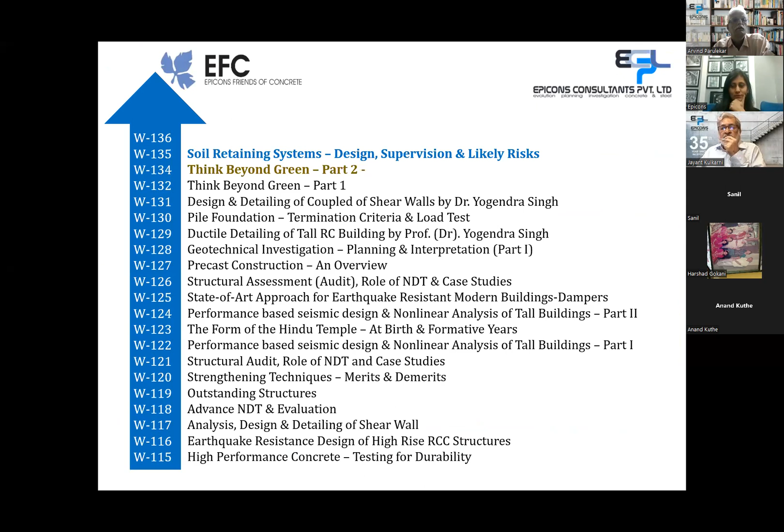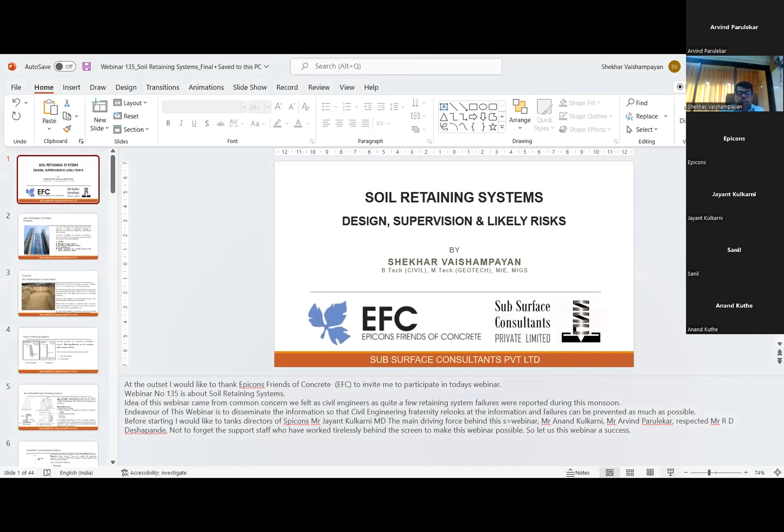Okay, there you are. We are going to have a discussion today on soil retaining systems, design, supervision, and likely risk. At the outset, I would like to thank Epicons Friends of Concrete (EFC) for inviting me to participate in today's webinar. Webinar 135 is about soil retaining systems.

The idea of this webinar really came from a common concern we felt as civil engineers, as quite a few retaining systems actually have failed during this monsoon. The endeavor of this webinar is to disseminate the information so that the civil engineering fraternity relooks at the site conditions and situations, and failures can be prevented in future as much as possible.

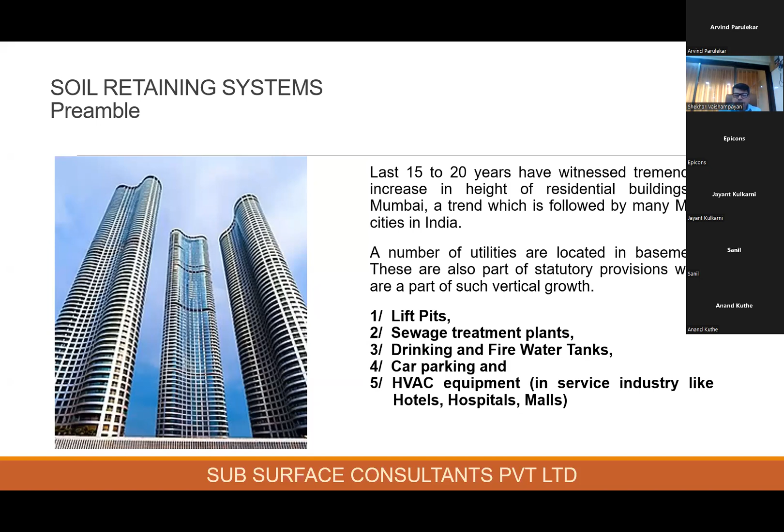Let's look right from the start, from the basics. We are going to look at some basics first so that we have a starting point. Generally, excavation is done these days by excavators like JCB or Poclain, and a good quality Poclain has a reach of about 4 meters. So generally, as and when excavation crosses 4-meter depth, one would tend to call that a deep excavation. The most common depth of excavation on account of utilities is between 7 to 10 meters, and in many cases it can go up to 15 to 20 meters.

In most projects, what happens is the excavation contractor comes to site and has a tendency to carry out the excavation nearly in a vertical line. It stands for a short time and gives a false sense of security to people - 'kuch nahi hota hai' - nothing will happen. But all of us know in our heart that this is going to fall down. Soil will remain stable for a short while and then it will fall down, taking a natural slope of the natural angle of repose or internal friction.

But then which will mean that it has to occupy and consume a lot of space. Now, is it possible for us? Because in most of the projects, the clear distance between the basement face and property boundary is only about 1.5 to 3 meters. In such cases, excavation with safe slopes, as said initially, would simply encroach into adjoining property. That's the main calamity or critical point.

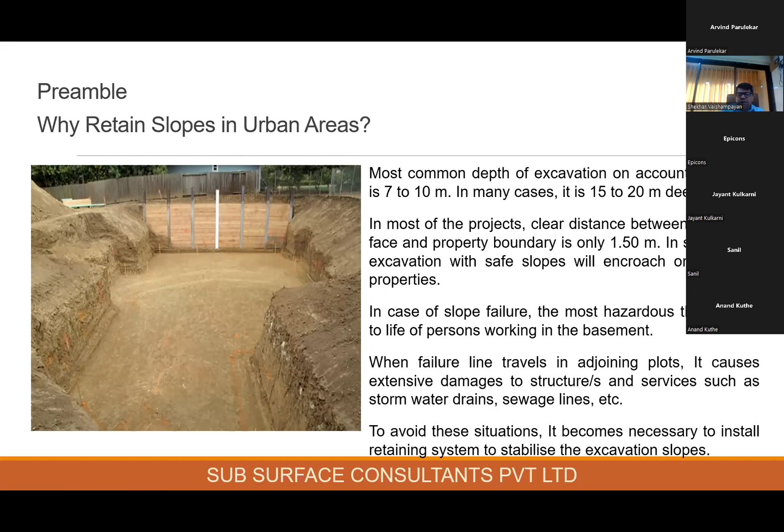In case of slope failure, the most hazardous thing that can happen is it will risk the life of people who are working in the basement region. And a failure line traveling to adjoining plots will cause extensive damages to structures and to services. To avoid this kind of situation, it becomes necessary to install a retaining system to stabilize the excavation slopes.

Now, generally speaking, let's look at what kind of retaining systems are possible. We all know generally that the soil or rock actually supports the foundation. But retaining systems are a typical soil-structure system, structures which support soil or rock, and they are also supported on the soil, but they support soil and rock themselves. So that means even inside retaining systems, there are two subtypes.

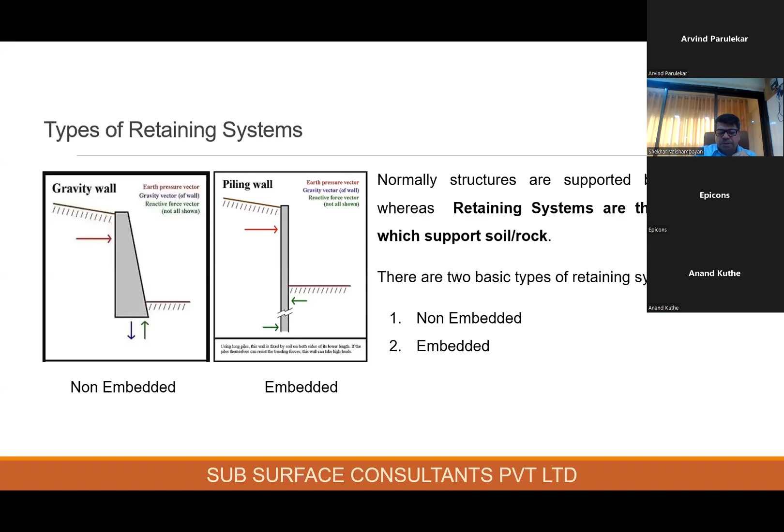One is non-embedded and the second one is embedded type. Now let me explain what is non-embedded and what is the embedded type. Let me go to the next slide.

Basically, we can see non-embedded type retaining system is the one where you excavate first and then construct, so bottom-up sequence. This supports soil fill behind them. So what one does is excavate up to the foundation depth, a small depth, not deep, and that's why I'm calling it non-embedded. And then you construct the structure on top, whatever may be the structure, and then you fill soil behind that.

Now, the examples of such structures are primarily gravity structures: stone masonry wall, then you can have an RCC wall. The first type would be the typical cantilever retaining wall. Then the second type, when the height of retaining wall becomes too much, you will have counterfort retaining wall. And in some emergency situations, one can even look at reverse cantilever wall, which is abutting the slope or the excavation side. Other types of gravity structures have also been in practice, like reinforced earth walls, gabions, crib walls.

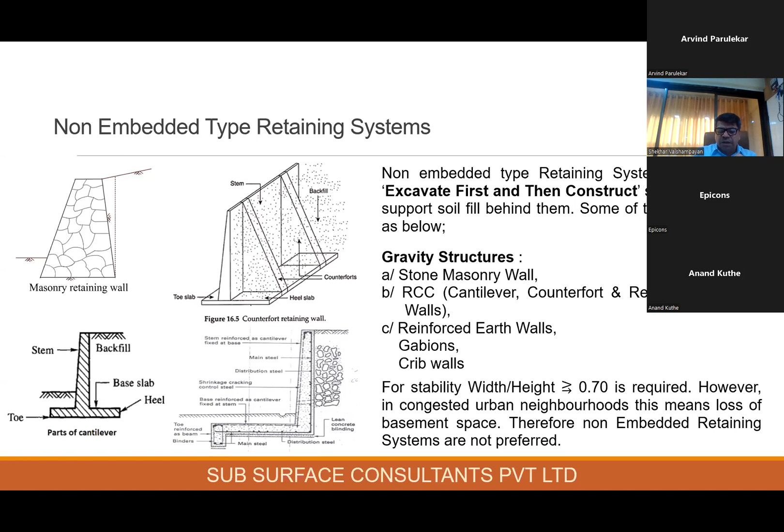All these walls have stability based on translation and rotation. Now, for achieving stability, the minimum width to height ratio is at least 0.7. When you have a width to height ratio of 0.7, in our congested urban neighborhoods or cities, there's hardly any space available. If you want to construct a basement below ground and cannot sacrifice width of 0.7 times the height, that will mean non-embedded type retaining systems are not going to be preferred at all.

Now, what is the other type of system? In embedded type retaining systems, we have install first and then excavate process sequence. In this, these structures are usually self-supporting. They derive stability from the passive resistance experienced below the excavation depth. And there are also two types of structures in this: one is cantilever type embedded walls, and the other is propped cantilever type embedded walls.

Now, what are these typical retaining elements used under this head? You can use sheet piles, which is a very conventional old method. You can use box piles, rolled sections to form box and then drive them. You can do contiguous piles, secant piles, diaphragm walls, rectangular panels like barrette panels and all that. Maybe something else would be possible, but these are all the major types used in practice.

Okay, so as we said in the last slide, we have a cantilever and a propped cantilever.

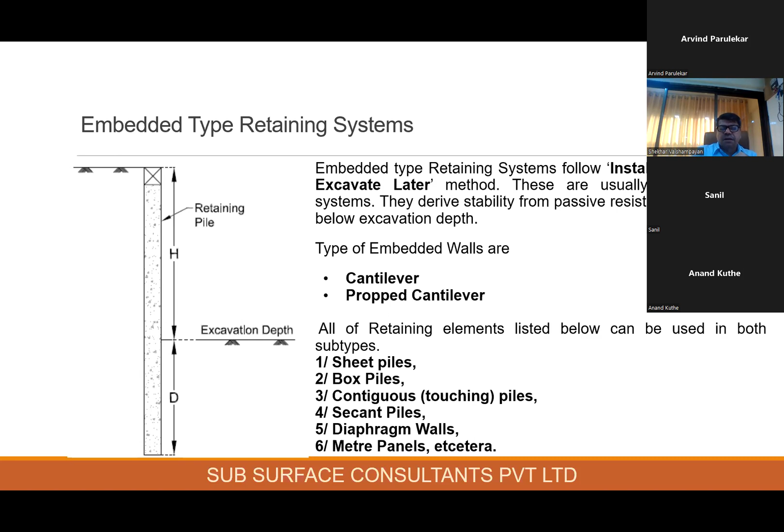To achieve propped cantilever support, we can provide support internally and externally. Internal supports will be horizontal struts and rakers from inside the excavation, and external supports will be deadman anchors or tieback anchors from outside. You can also do propping at the excavation level.

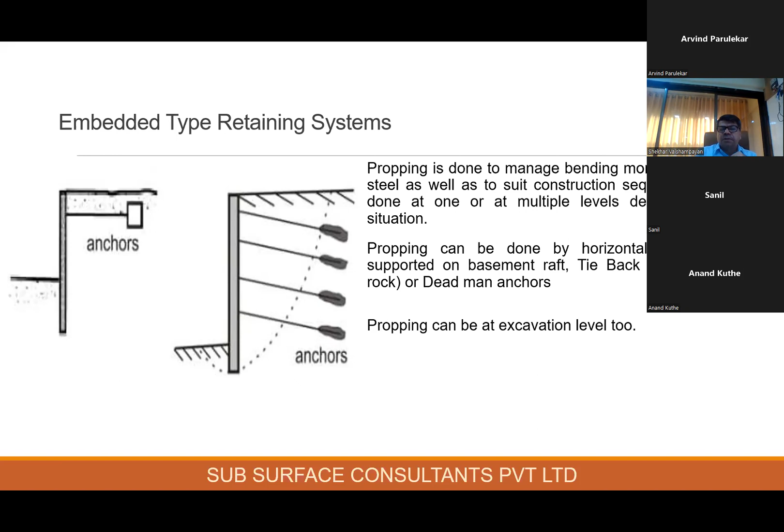What does propping do for us? Propping allows us to reduce the spans, so bending moments are reduced, and you can save on the reinforcement steel in the retaining systems, piles, or walls. It also can suit the construction sequence. Propping can be done not only at one level but at multiple levels, depending on the site situation.

Now I'll explain what different retaining systems are in practice right now. The first type is contiguous piles. This is a row of successive unconnected cast-in-situ concrete piles with a small gap of about 100 to 150 mm between the piles. Typically these are called contiguous piles.

These are very suitable in cohesive soils because arching of the cohesive soil prevents collapse of the soil in between. This is usually used where the groundwater table is not high. Permanent liners may sometimes be required, but this is typically called touching piles these days, which is a misnomer since they are not supposed to touch each other. The gap between the piles is also expected to release water pressure, if any.

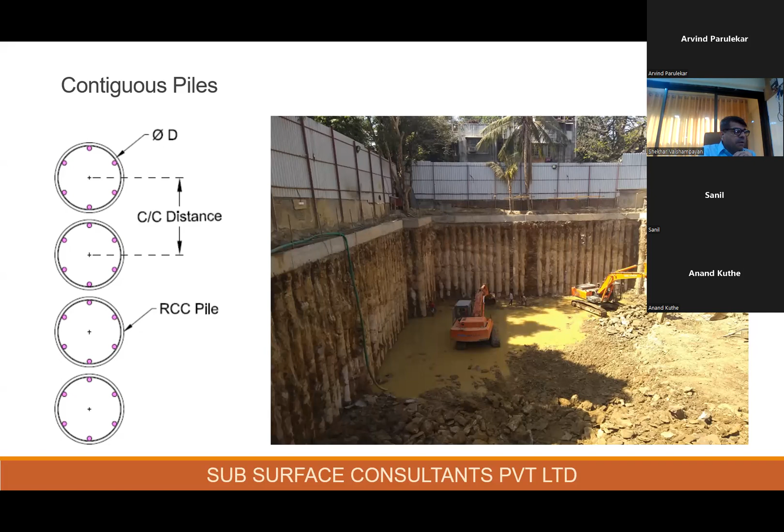Now let's go to the next slide. Second, secant piles, just like contiguous piles with a gap in between. Secant piles are a row of successive overlapping cast-in-situ concrete piles. A typical overlap of 100 to 150 mm is provided, similar to before, but here we have an overlap instead of a gap. This is typical of secant piles.

These are most suitable in non-cohesive soils with a high groundwater table. When water is flowing in, you need to stop it from entering the pit, and erosion of soil can be controlled. First, the PCC piles are installed, drilled and cast. This goes up to the excavation depth, or maybe a little more, or up to rock depth if rock appears before that.

Then the RCC piles are drilled within the next 3 to 4 days, while the concrete is still somewhat green, to achieve the overlap so that the PCC pile can be cut easily. Then RCC piles are installed and cast inside with reinforcement, which is meant to carry the bending moment. The overlap between the piles is basically to ensure that water ingress is minimized. You can see in this picture, the water is practically not there.

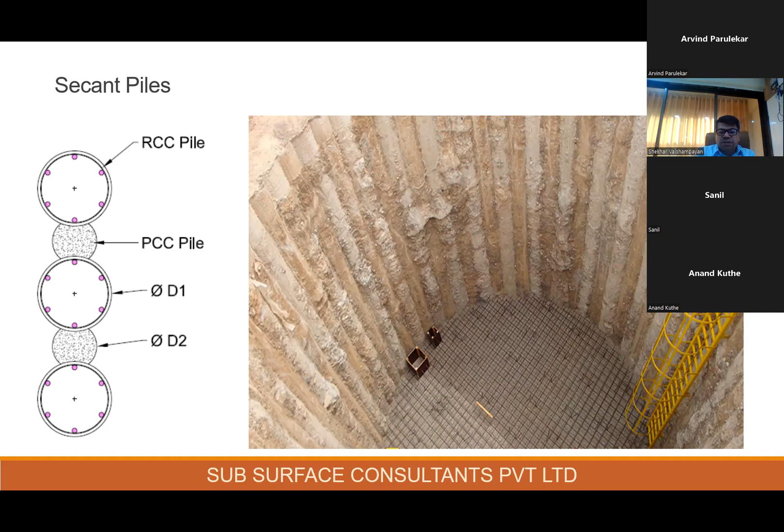Now let's look at the propping systems, different propping systems.

Let's look first at external supports. The basic external support is where sufficient space is available. Traditionally, a deadman anchor has been used, mainly in ports and jetty constructions where a lot of space is available. The deadman has to be installed well outside the failure wedge so it can develop passive pressure on the face, which allows it to carry the tension in the string in the middle. But this requires a lot of space, which is once again not possible in the urban setting.

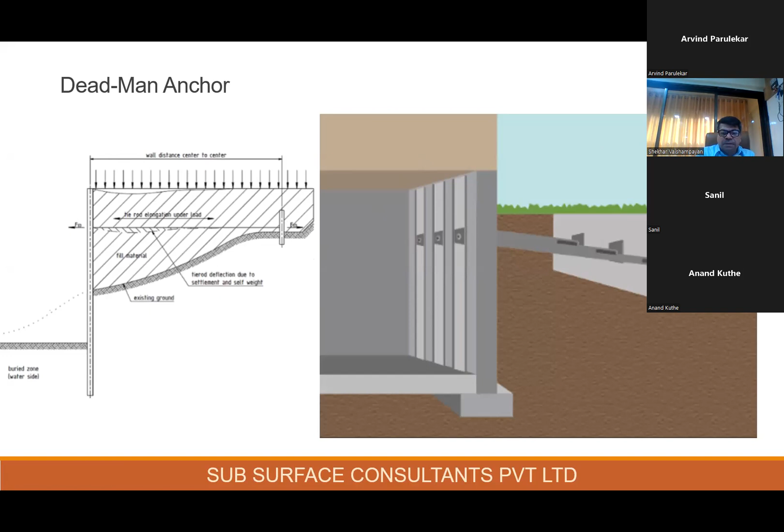A typical, very commonly used system would be to adopt tieback rock anchors. Where space is at a premium, tieback rock anchors are used to control deflection. They are also used to reduce bending moments and therefore the steel in the piles. It is possible that one may have one level of anchor, but depending on time or excavation demands, 2 or 3 levels of anchors may also be used.

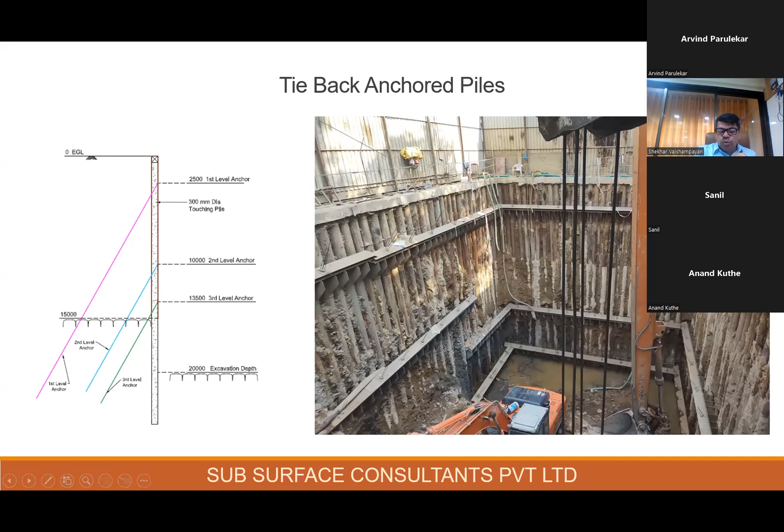Okay, now let's look at the inside supports. What used to be done is rakers on the right side. You can see there are rakers actually placed against the retaining walls. These are a very old method and possibly used today only in SOS conditions.

Rakers would require, if you use rakers, it will obstruct your flow of work, so they are not preferred. They require very firm support at the bottom, maybe a pile head or a column bottom or a raft at the bottom to be able to take this load.

So you can see the situation on the left side where a complete horizontally braced struts are possible, and now they actually can be provided in different levels. And in general, in this case, enough space is left in between.

You can see some construction equipment below, down here, yellow colored, and they are carrying out their work here. And the bracing has to be also designed in such a way to accommodate the movement of the equipment below.

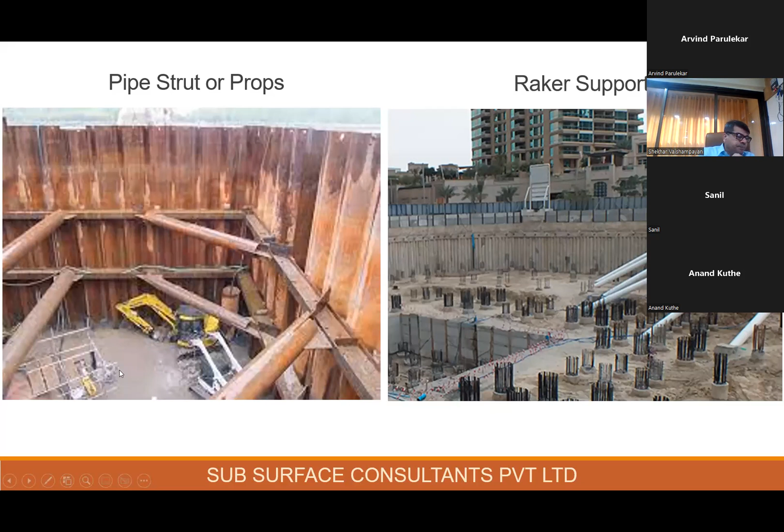The next typical structure would be diaphragm walls or rectangular piles, meter panels. Meter panels and diaphragm walls are basically brother and sisters, they are the same thing. So rectangular shape piles are used, either using a grab or a rectangular shape baler, and you actually use them to excavate this.

These are very popular in the alluvial soils. You can see in places where there is a lot of clay, these are done actually very easily. You can see the considerable depth actually has gone into this, the truck looks so small here, so this is probably maybe 20 meters or so.

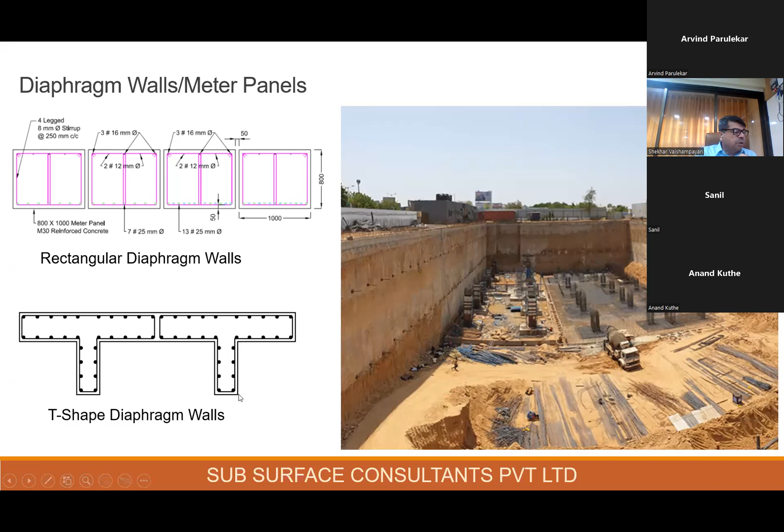And they are not only rectangles, but wherever more stiffness is required, you can also use T-shaped diaphragm walls. So both of these are also possible to you. And we can go to the next slide.

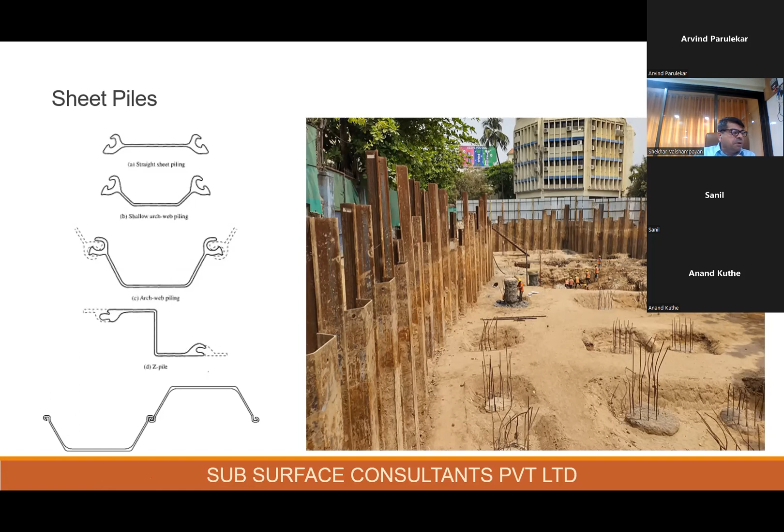In this particular site, the bottommost was used. There is a locking arrangement at the end of each of this, a male and a female joint. So once they get actually inserted or locked into each other, they prevent ingress of water when the excavation is done. So sheet piles were very commonly used and a preferred method.

Now we are going to look at the next one. So we once again have an urban setting here. You can see a lot of structures behind this, and we are forced to do contiguous piles. You could not do sheet piles, or secant piles in this place, because they're either costly or not possible to execute.

Maybe liners were required, I don't remember now, but this is what was done. And what we did here was we excavated, and as we went on excavating, we went on doing gunniting or shotcreting on this face by doing jali. You can see jali in some places here, and gunnited the whole face to make sure water doesn't flow in and erosion of fines doesn't take place.

Obviously we have to do this in a fair season so that when it comes to monsoon, we are actually prepared for this excavation. The pit is more or less dry, we can carry out excavation. So we can say this is a variant of contiguous piles with shotcrete, that is a variation.

Now, contiguous piles can also be paired with bentonite piles. Instead of doing this shotcreting on the front side, which is negative side waterproofing, you can actually plug the flow of water where it enters. So where the water is entering from this side, you drill holes on the upstream side, between the shore piles and the property boundary, a small hole between two piles, and go right up to the bottom and pour sand cement bentonite slurry. So it forms a low modulus concrete, very plastic in nature, so that also plugs the gap and doesn't allow water to come in.

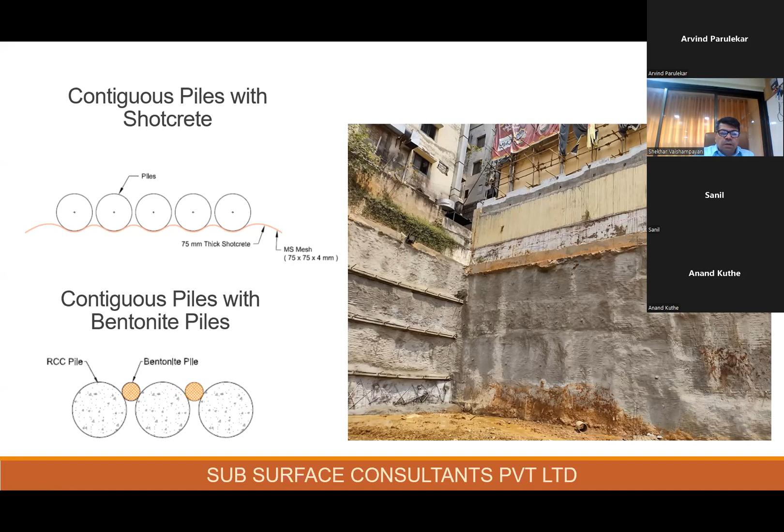The next one, this is very commonly used these days: piles with rock bench and ledge.

As and when you have an excavation depth X or H you want to reach, and way above that you hit bedrock, there's a tendency to use the strength of the rock to reduce the length of piles and economize on pile length. The rock bench is provided only if bedrock is in good condition and present at a depth well above the final excavation depth. It will also require sufficient space from the basement wall and property line to ensure adequate width of the rock bench.

It is possible to design a retaining pile length, as shown here, which is less than the final excavation depth, but it is better and safer to provide the pile length right up to the bottom of the excavation. At least that should be done. This rock bench is always very susceptible to excavation effort and can fall down.

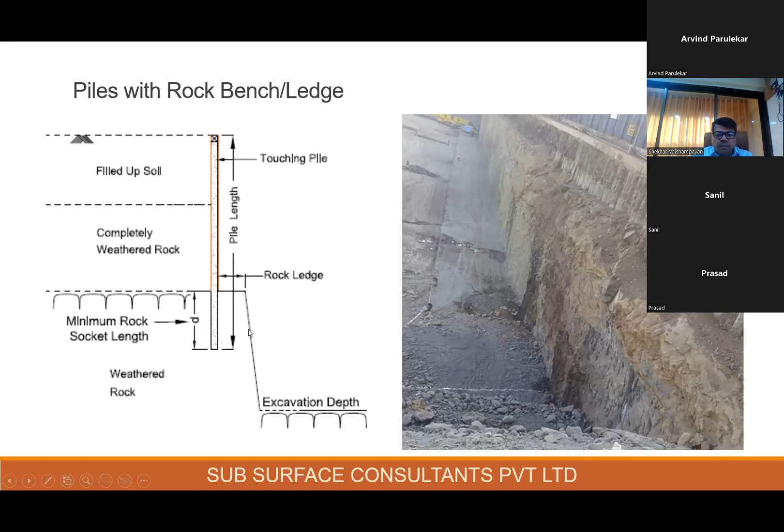Hello? There's some disturbance. Okay, then let's look at the next option.

In this next option, we have shotcrete gunniting with nailing, soil nails and anchors. This is actually not install-first-and-excavate, but a variant of the first method where you excavate first and then stabilize.

When sufficient space is available between the property line and the basement wall, you can try to adopt this. You excavate first and then stabilize, and go on to do the work in steps.

You first do a step excavation, drill the rock anchors or nails horizontally, put jali on top, then connect that or plaster it by putting a shotcrete layer so that you have stabilized this surface. After stabilizing this surface, you come to excavate the next step and go on gradually.

You can see here that there is definitely a step inside, or you are losing more space of the basement. So it is possible only where such space is available.

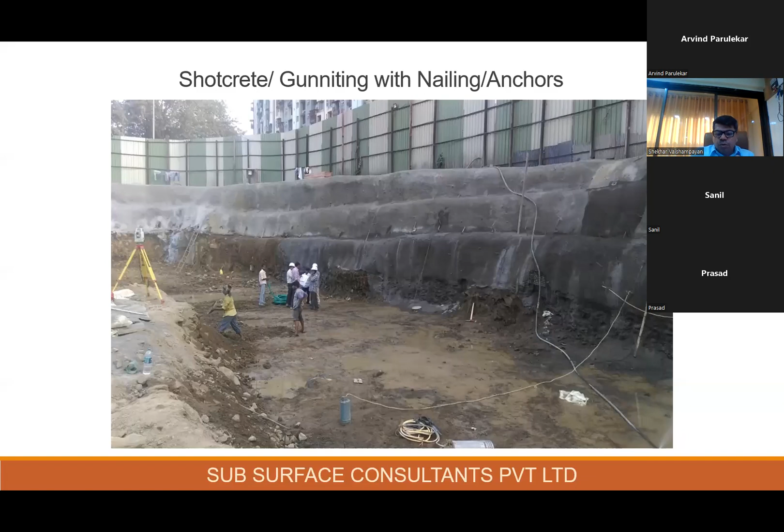Okay, so this is all we can have about the standard typical retaining systems. Now I am coming to an area of risks involved in the design of retaining systems. At this stage, I have finished my segment on the types of retaining walls, and I would like to discuss aspects of the design of retaining systems.

In the design of retaining systems, obviously, basic principles of statics are used where equilibrium has to be achieved and minimum requirements are computed. Describing the whole thing in detail would be like sitting in the classroom again in college days, so our idea here is to share our knowledge with you so that these cues act more like red flags to you in the future, while designing as well as checking somebody else's designs.

So what are the things that we look at? The risks involved associated with designs. In designing retaining systems, you generally compute destabilizing and stabilizing forces. You can estimate them using standard practices, and the length and reinforcement of the embedded retaining system can be easily worked out. Let's look at three basic main steps.

You can take the summation of bending moments, set it equal to zero; this will yield the minimum embedment depth of the embedded retaining system. Sigma H equal to zero will yield the location and value of maximum bending moment. I won't go into how. The third factor, sigma V equal to zero, is not very relevant in the case of retaining systems, because they are not part of the permanent structure. These are basically enabling structures, and very rarely are retaining piles loaded with vertical loads.

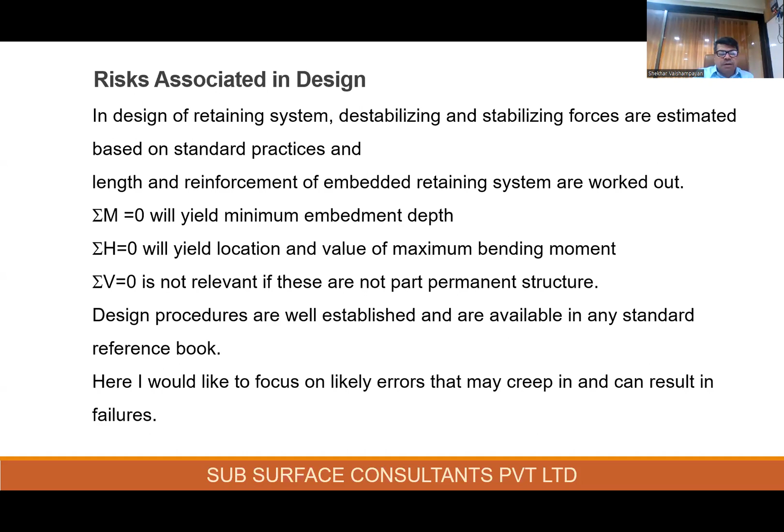Design procedures for all of these are well established, and many softwares as well as standard reference books are available. I would like to focus on likely errors that might creep in and result in failures. So let me go to the first one: the results in likely errors in engineering parameters themselves.

Let me list them first, and then we'll take them up one by one. Design parameters for each stratum of soil and rock, where you establish, compute or estimate active or passive pressures; then water pressure due to the ground water table; then surcharge pressures because of various loadings at the edge of the excavation; then deflection of the pile or retaining wall; then existence or evidence of rock ledge; and then assessment of the possibility of heaving of clay and sand boiling conditions and its mitigation. So these are the conditions we are going to look at.

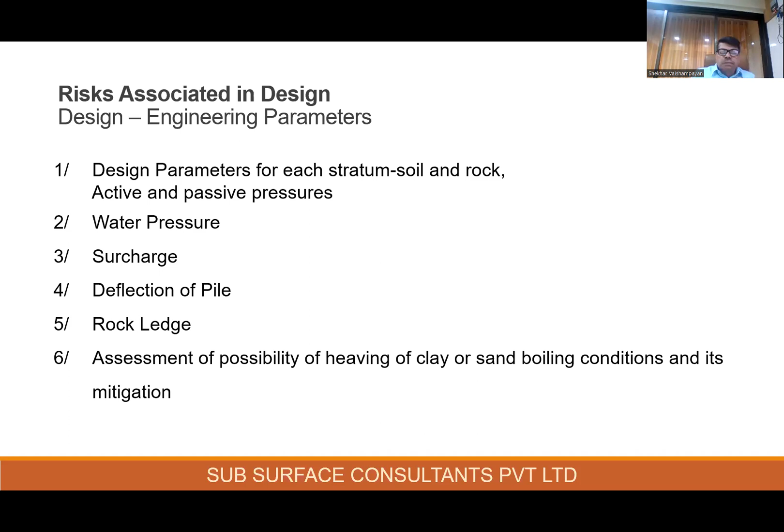So the first one would be the difference in design parameters in site conditions. So first is design parameters.

So what everybody does at site is, you drill some boreholes, few boreholes, and after drilling them you come to a conclusion and calculate, doing some lab testing, calculate C, phi, gamma, UCS of rock, etc., until you estimate your design parameters.

Now let's look at two typical cases. The first case on the left side, the perimeter is 84 meters, and we had two boreholes drilled in this area, so one borehole for every 42 meters, and somehow these boreholes are not anywhere near the perimeter of the building or the excavation line. So these are basically at irrelevant locations, and that can give us a problem because the variation in the strata is not known along the plot boundary.

Now consider the other case, a much bigger project where the perimeter of the plot was 1150 meters. 30 boreholes were drilled here, out of which 14 boreholes were more or less along the perimeter, so one borehole for 85 meters each. The locations were relevant definitely, but they were too widely spaced. So these are two limitations.

In addition to irrelevant test locations and insufficient number of boreholes, we also have insufficient laboratory testing. Suppose somebody drills a hole and tests only 2 or 3 samples of soil and maybe 1 sample of rock from each borehole - then the data available is very limited.

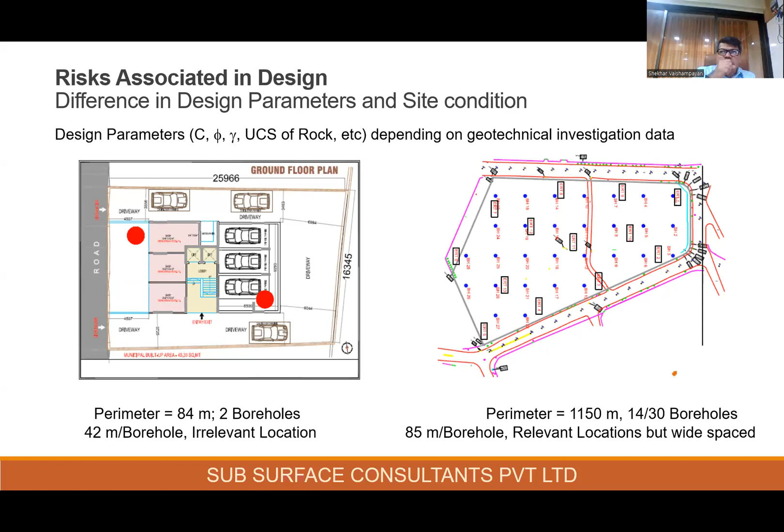Similarly, the same is true of field testing. If you do not conduct tests at regular intervals, you would not know the variation of shear strength along the depth. And the third important thing is the supervision team not informing about the variation in stratification during installation. These three things create a difference between design parameters and actual site conditions.

The next important factor is the water table and water pressure. During investigation, we drill boreholes and report the water table found in them, then select a design water table based on that. Now one has to really account for monsoon variation - the rise in level during monsoon has to be considered.

If that is not done, or even if it is done, you can get a sudden increase in water table because of flash rains, which is very common these days. You end up with issues like erosion of fines, piping because of the sudden rise in height, and soil boiling or sudden overloading.

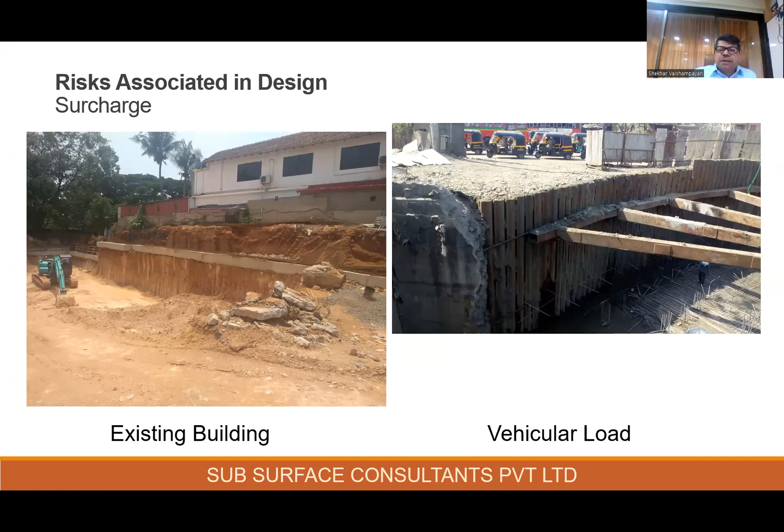This creates a kind of dynamic load. And it's also possible that if this space remains empty for some time with no work being done, somebody might plan to place something else here which is not thought of or planned.

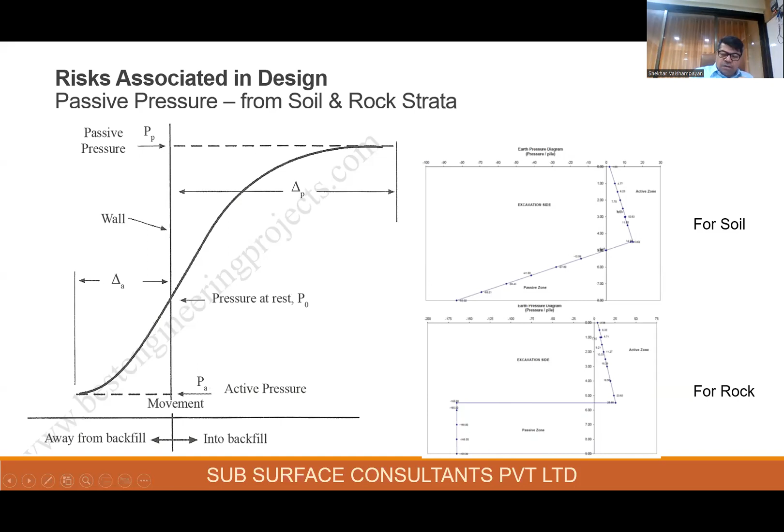But in case of rock, the situation is different, and the allowable shear stress in the rock is actually used, or we tend to use that as the passive pressure directly. More about this in the next slide.

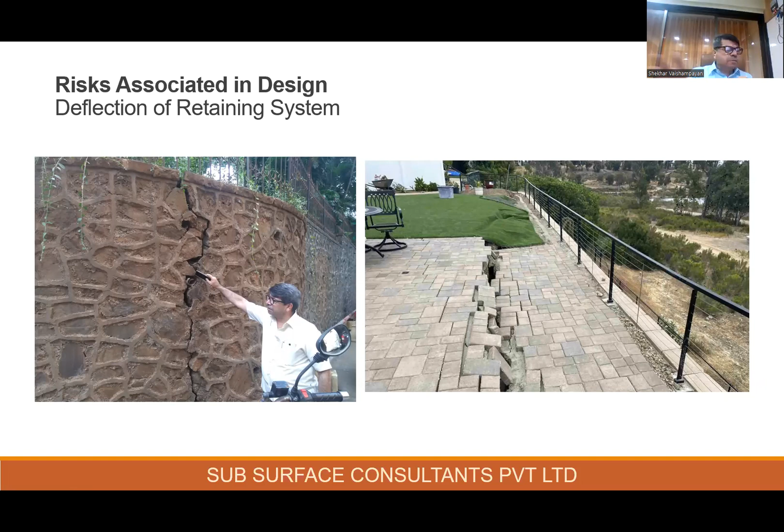So during excavation, one must completely prevent overcutting of the bench, which will actually increase the risk and can cause failure of the slope. Only if you're lucky, it will not happen.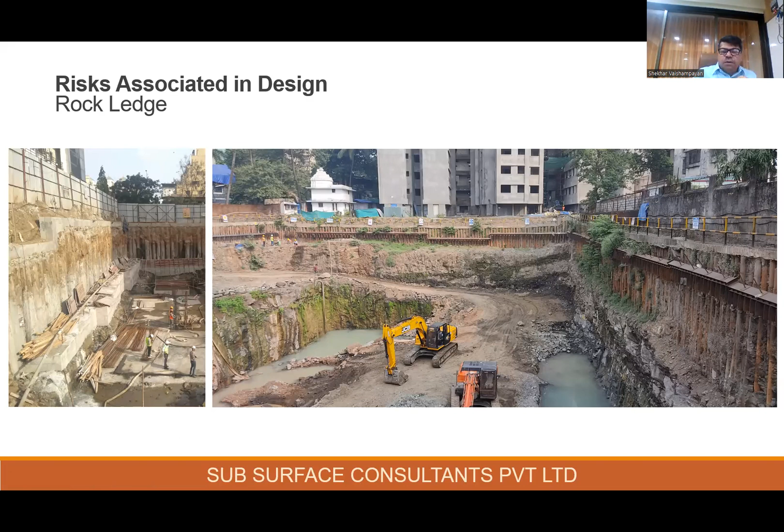Now, these two things that are coming are basically not experienced in Mumbai. Heaving of clay: consider you are working in an alluvial soil deposit, and if we meet soft to medium stiff cohesive soil in the middle, and we excavate wide in the basement with shore piles on both sides. At the bottom of the shore pile, there is clearly gamma H acting as a surcharge on the sides, and we have removed the surcharge from here because of excavation, and removed the water also by dewatering. So this will tend to push the soil inside. If the SBC of this clay is less than gamma H, the overburden pressure, then there is a tendency of the clay to move inside and cause heaving. This can also happen in case of over-consolidated clay on its own. If you just excavate and leave the over-consolidated clay exposed, it is possible that it will simply heave naturally, even without overburden. So we have to work against this by increasing the embedment depth to a sufficient value, so that the SBC of the clay inside the excavation is sufficient.

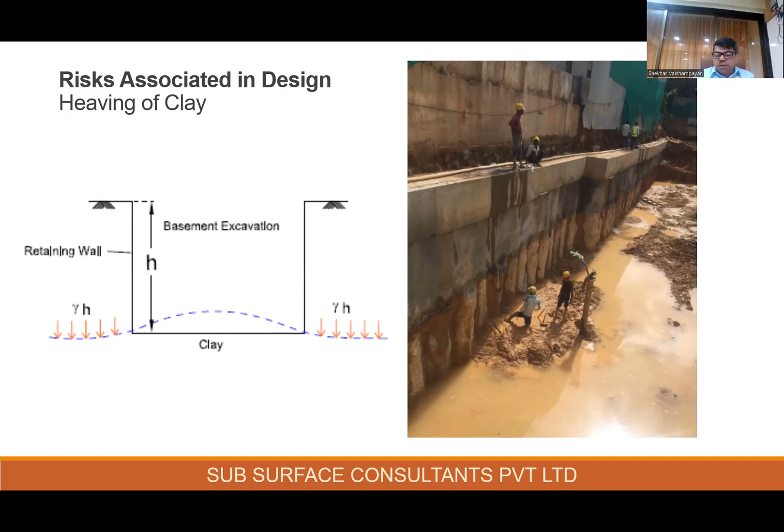A very similar thing happens in case of sand boiling. Let's say we have done the shore piling, retaining piles are in place, and we do excavation, but there is a water table inside, so we have removed water. We have put sheet piles all around, so water is not coming in through the retaining piles. The moment there is a difference in water head, seepage starts. This will create an exit gradient at this point. If the embedment depth of the pile is not sufficient, you will end up with an exit gradient close to the critical value of 1. And if that happens, this area will end up with boiling, and the rigidity of the soil will be totally lost. It will be a very messy condition. So unless we have enough depth of penetration, one should not do excavation this way.

So the heaving as well as the sand boiling conditions can be checked beforehand, before we meet them on site.

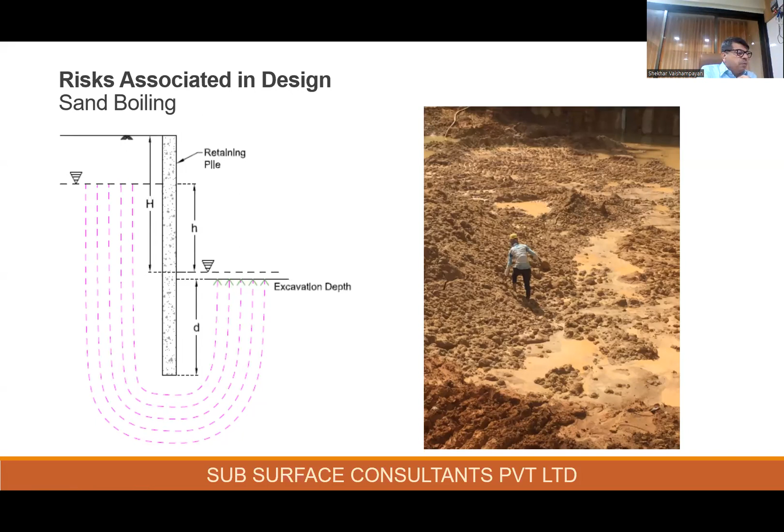Now let us focus - these are all the points on the design side. Now let's go to supervision, and points to focus on in supervision.

So we'll discuss the aspects of supervision of retaining system. Now, supervision is a very key factor in the successful execution and performance of the retaining system, because we normally don't employ educated and hardworking persons there, and usually the situation becomes reversed.

So what is the role and responsibility of the site supervisor? He must understand drawings, the methodology of construction, pile as well as anchor installation, waling beam arrangement and fabrication. He should understand design conditions and applications during execution. He should ask if he doesn't understand, and if he finds a variation compared to design conditions, it should immediately be reported back to PMC, or through PMC to the geotechnical engineer, architect and structural engineer, so that proper coordination can take place.

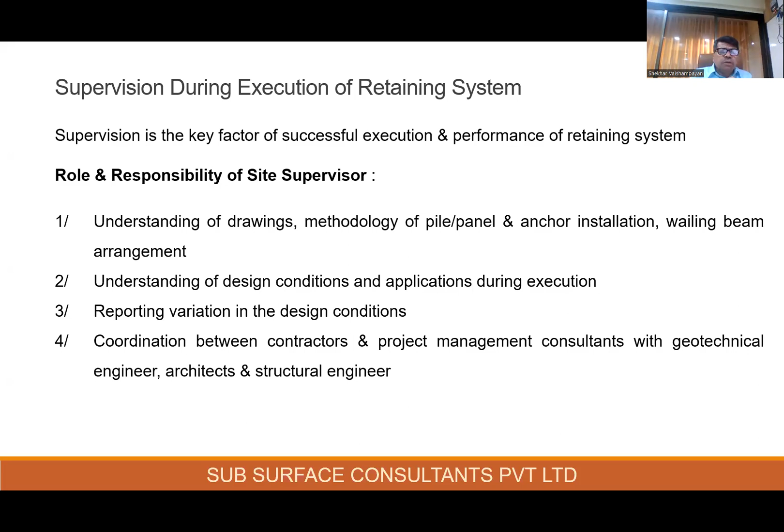Now let us look at these aspects. When you are supervising pile installation, what are the factors that come into picture? Let's look at them.

They are very important. First is pile verticality and alignment, and fixing of temporary and permanent liners.

For this, we'll refer to the next slide. You'll see that retaining piles have to be installed in a given alignment, and they also have to be installed vertical. Any error in installing the piles will mean that the pile might end up in the basement. And if the pile ends up in the basement, you either have to chip the pile or reduce the basement. Reducing the basement is not possible, so generally one ends up cutting the pile in the basement.

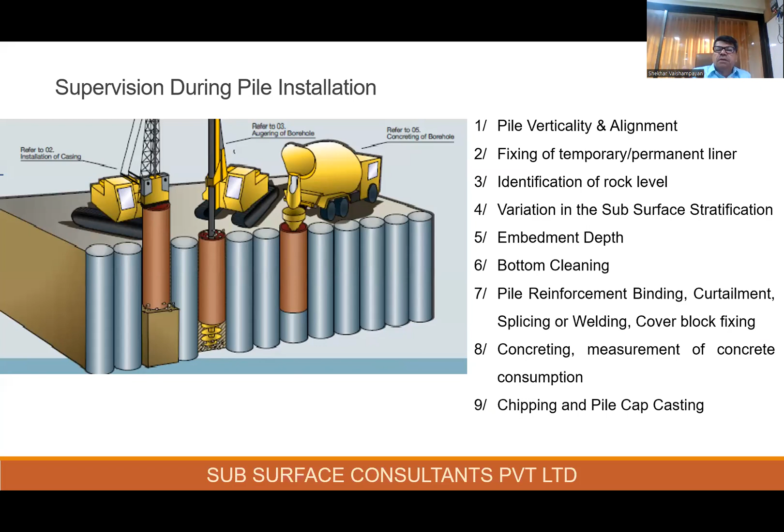And if you cut the pile, you're actually increasing the risk once again. The second factor is the fixing of temporary or permanent liners. This we have seen as a common problem. Installing the casing at the location of the pile is very important before concreting, because till then collapses can happen in the soil, particularly if the drilling or boring is below the water table.

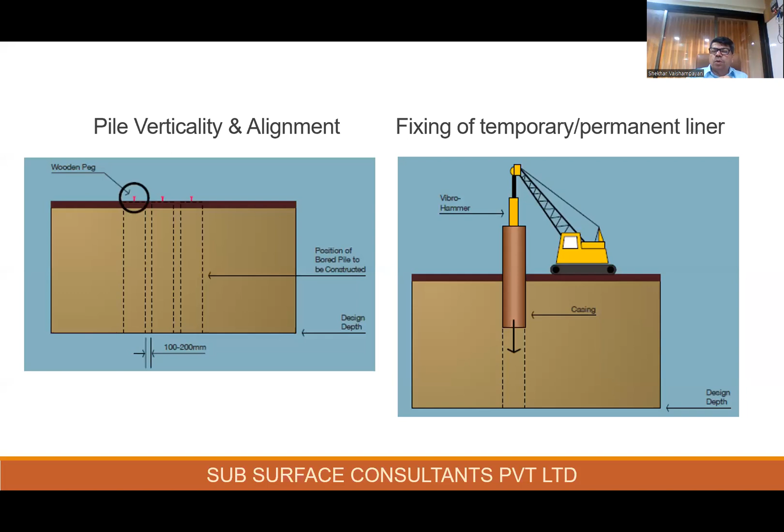We had experience at one site where insufficient length of temporary liner or casing was provided, and when insufficient temporary casing was provided, the collapse happened in the soil layer because there is a water table. So the collapse kept on happening, and the continuity of the pile was always questionable. The integrity was compromised. So to make sure the liners do the job properly, they have to be installed up to the strata.

Then, drilling to termination depth. The second part of pile installation is to confirm whether the pile has reached the required depth. This is very important in case of retaining systems.

We call them as piles because the piling machinery is used to install the cantilever beam. And many times what will happen is, during this drilling to termination depth stage, the piling contractor will come back to us saying, sir, this rock is very hard, I'm not able to drill to the required depth, please give me concession and allow me to stop boring at a depth below specified.

This will involve correct identification of rock level also. In such a case, if the material pile sample is indeed very strong rock, then you have to change the method of boring or drilling to a higher capacity machine. We have very strong and big machines today that can be used, or you can use the core barrel method to drill through and reach the required depth. But this is one factor: the required embedment depth cannot be compromised on.

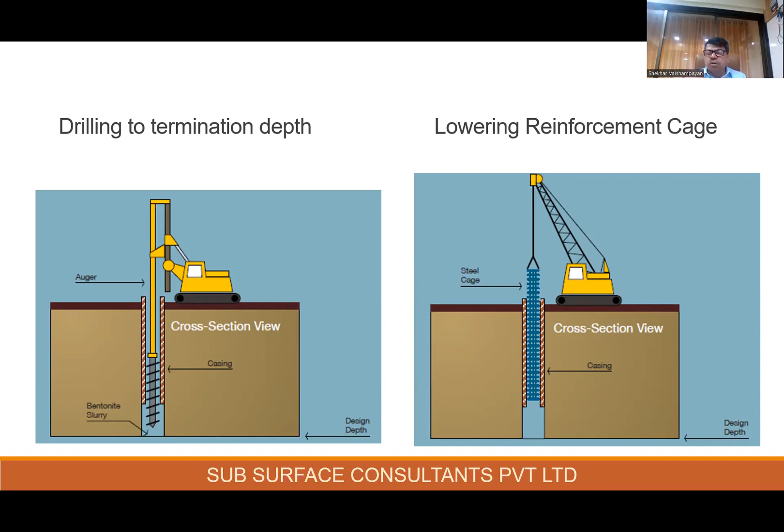Once you have completed and gone up to the bottom level, the third and most important factor is the concreting, because concreting in piling is usually done underwater. So the Tremie method is used to carry out concreting from bottom towards top.

Tremie is a small diameter pipe which completely displaces the muck and secondary material inside the pile hole to the surface, usually called soil concrete or laitance. If the concreting is not done properly, the pile shaft will not have enough strength, and if it doesn't, it would not act as a retaining system, and the entire effort would be wasted. So the Tremie casing can only be taken out of the pile after the entire concreting work is completed.

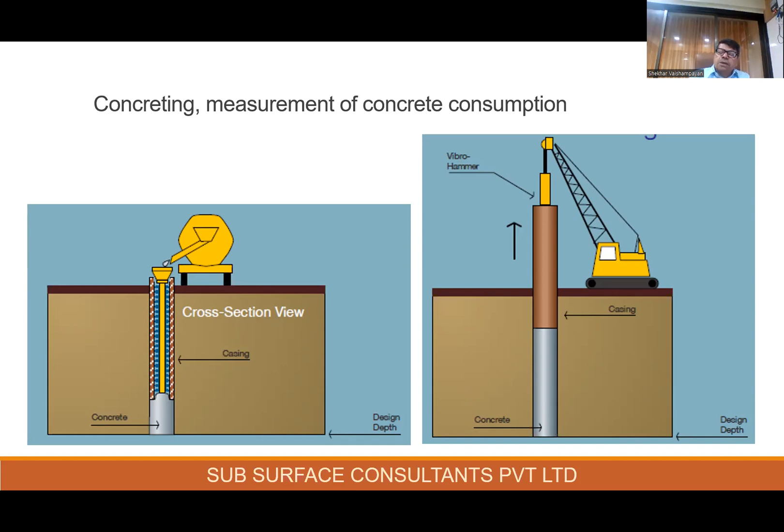Now, an important factor here is how much concrete is consumed. The concrete consumption is a good clue to the quality of concrete achieved. If the concrete goes in more quantity, that means there is somewhere a bulb formation or concrete flowing into some cavity. And if it is less, that is also a cause of concern, because is squeezing happening, is necking happening—even that has to be checked and gone through.

We had an event recently when one or two piles simply fell down. The reason was that the dowel bars from the reinforcement were not engaged, not merged, not put into or locked properly into the capping beam.

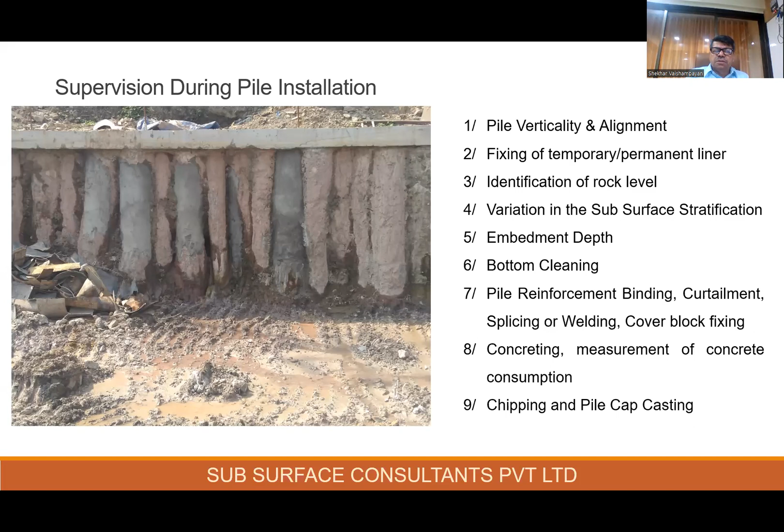Now all this can happen at different sites. So a very important part is that a supervisor is a must—that person has to be qualified and has to pay maximum attention, has to be very sincere. If that doesn't happen, then we really have trouble at site. There's a lot of risk, and all these things, though they appear very small, can individually cause failure of the pile. If the pile fails, our retaining system does not function smoothly at all.

Now we'll look at the next factor: tieback anchors and installation. We have seen how important tieback anchors are. The anchor's location is selected, you excavate up to a particular depth, and then you drill a hole at an incline.

When you drill a hole at an incline, you use high strength deformed bars—very strong bars where the Fy value, the yield strength of the steel, is as much as 1850 newtons per millimeter square as compared to our normal Fe 500. They come in strands, and when they are in tension, they are subjected to stress corrosion. We know all of that.

So the most important thing is that the quality of the strands has to be checked repeatedly and immediately on reaching site. Any spurious branded steel should not be purchased—only standard material should be purchased. This has to be checked rigorously and thoroughly by the supervisor. So anchor material quality is checked.

Then the second thing is, are you drilling the hole of the given diameter? Supposing the drawing specifies a 6-inch diameter hole, that is 152 mm, has the correct size bit been used? Is the length of the anchor sufficiently and properly drilled? Is a sufficient length gone into the hard rock?

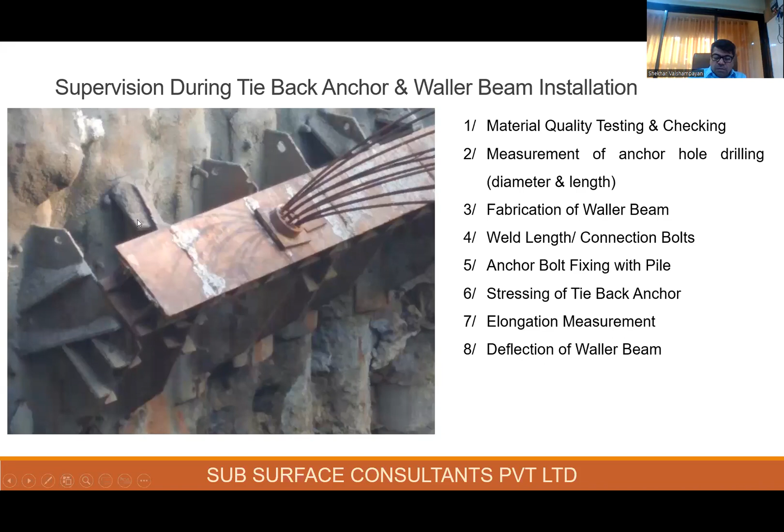I'll skip this slide, go to the next one. In stage construction, we typically see the anchor is first connected and then released with time.

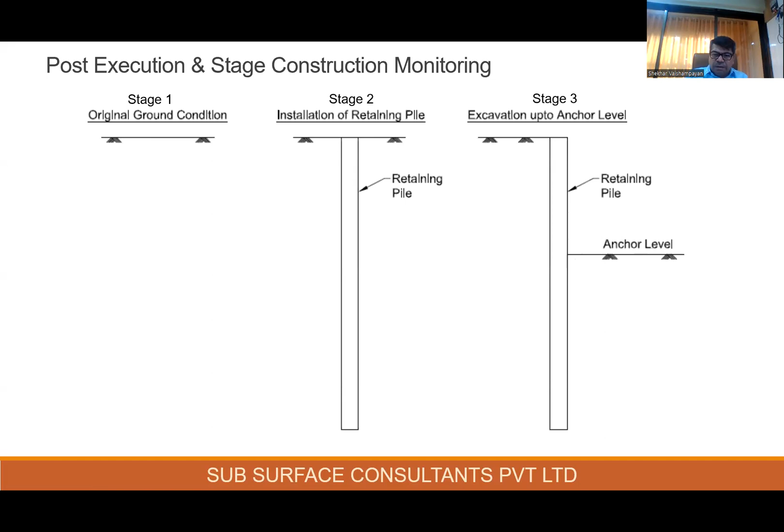So then we go to the next slide and see that we put an anchor here, and when the anchor is stressed, there is a tendency for the pile to move back. Probably the deflected shape of the pile will be somewhat like this.

So the head would then move back because the anchor force is actually much more than the active pressure that was initially there. If you see the previous slide, whatever active pressure is there, that value is, let's say, X, but then you are going to put a passive anchoring force which is much bigger than that. So it will tend to move back this way and form a deflection curve this way.

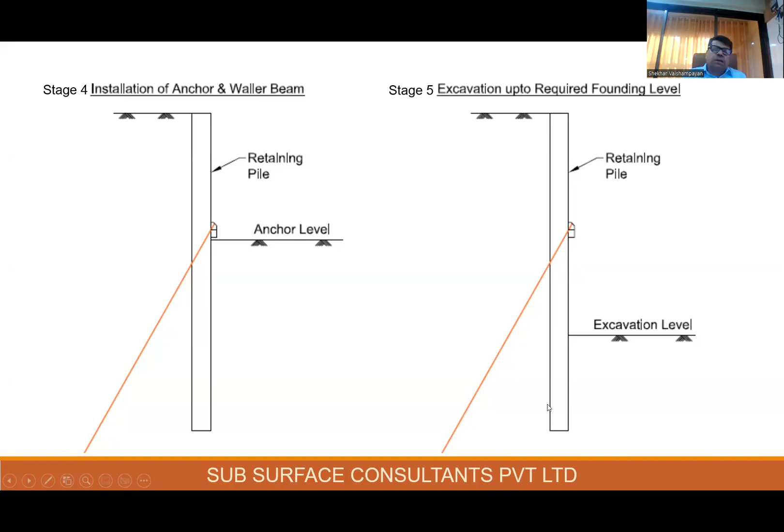And then you excavate further, up to the excavation level shown on the right side. Once you reach this level, it will once again tend to move forward this way, and then you start constructing.

When you start constructing, you come up to the bottom of the anchor. Usually you select the anchor level strategically so that it is just above the slab. So you construct the slab here, place it here, and fill the gap in between using concrete, so that the pile movement is locked, and then you release the anchor.

So we are achieving this situation once again. Once this is done, you will find that the retaining pile can actually be released, and the anchors are taken out. The waller beams can also be taken out and are disposed of.

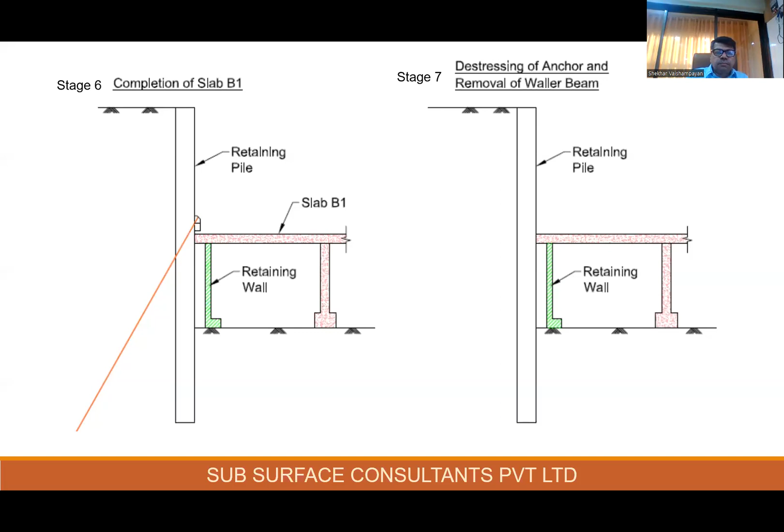So what is the summary? The summary would be that design and site conditions are totally interdependent. They cannot exist separately by themselves. Supervision is very critical for closely monitoring the situation, and if that is not done, failure can happen because of negligence at various intermediate stages.

The second important part is that during execution, whatever design assumptions have been made have to be validated. For instance, if you said rock is at 5 meter, 3 meter, or 2 meter depth, that has to be actually verified and validated during construction. If that is not done, and a variation is not reported, there is a problem.

Usually, while selecting a shoring system for a given site, it must be technically correct and safe, both. This is usually a tailor-made situation. You cannot take a situation where you have designed one shoring system for site A and lift it to place on site B, saying it is directly applicable there. This is very rarely so, because the soil would be different, bending moments would be different, everything would be different. So for each and every site, the shoring system would be tailor-made.

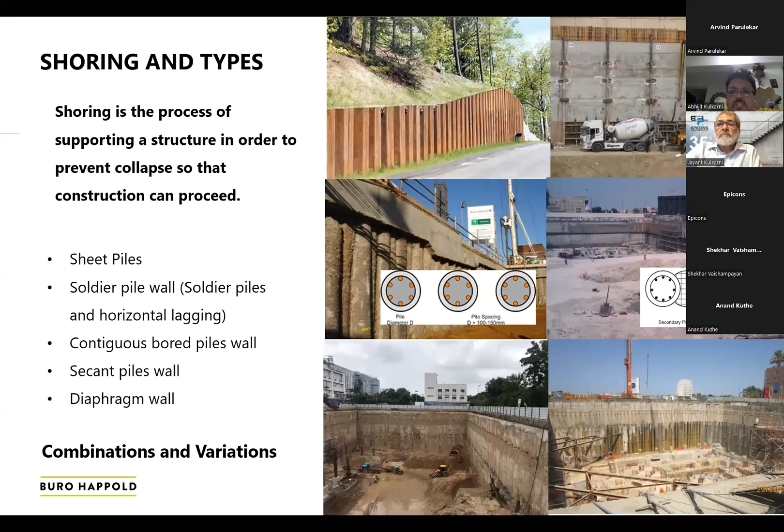Let's go quickly through the shoring system, which has already been discussed. You have sheet piles, soldier piles which are I-sections with planks, contiguous piles, secant piles, and diaphragm walls. Given a project, there will be combinations of these depending on rock type, soil conditions, surcharge, and groundwater conditions. I'll skip detailing this further.

I'm skipping it because we've discussed it a lot already and I don't want to bore people.

This, shown at bottom right, is generally used in the Middle East to align construction of piles at grade level. You cast a guide wall with thermocol inside, then remove the thermocol, giving you circular interventions. Through that you put in sleeves or augers and drill the piles vertically. There are challenges keeping verticality, but there are codal provisions for tolerances, which I'll cover later.

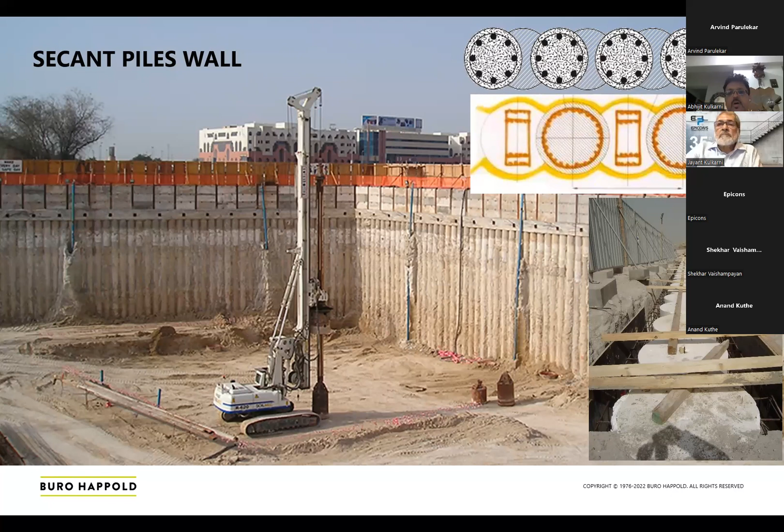We discussed the methodology: you drill and cast the guide wall, then drill in, and depending on soil conditions you put bentonite or soil retention fluid for the borehole, then place the cage, then cast from the bottom. This is repeated depending on whether it's a contiguous wall or secant wall.

Then there are diaphragm walls, which are more or less top-down constructions, and diaphragm wall is probably the more difficult type of construction. This is mainly because diaphragm walls tend to involve deeper excavations, and you also tend to have water resistance or water retention loads on the wall. So the panels and the cage being installed become heavy, making execution tricky, and the gaps between diaphragm wall panels become areas where soil or water can leak. That's why the installation process has to be absolutely spot on.

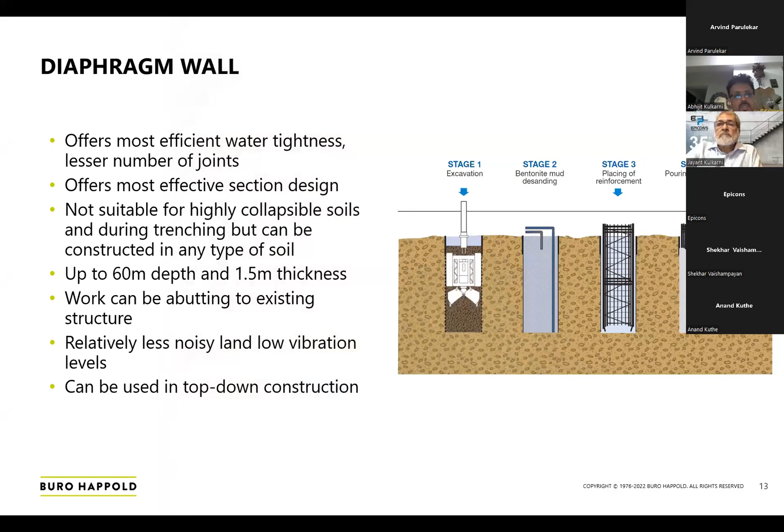It's basically seawater pulled in to create a marina, and that water was about 15 meters deep. We couldn't physically excavate next to that water, although there was a marina walkway around it. So what we did was construct an internal wall about 10-15 meters away from the marina wall. We had a diaphragm wall all around the plot, and constructed this internal wall which was not a diaphragm wall, so it was a combination. This was anchored, and the main structure was constructed and used to strut and resist the permanent diaphragm wall, and the second stage construction was carried out.

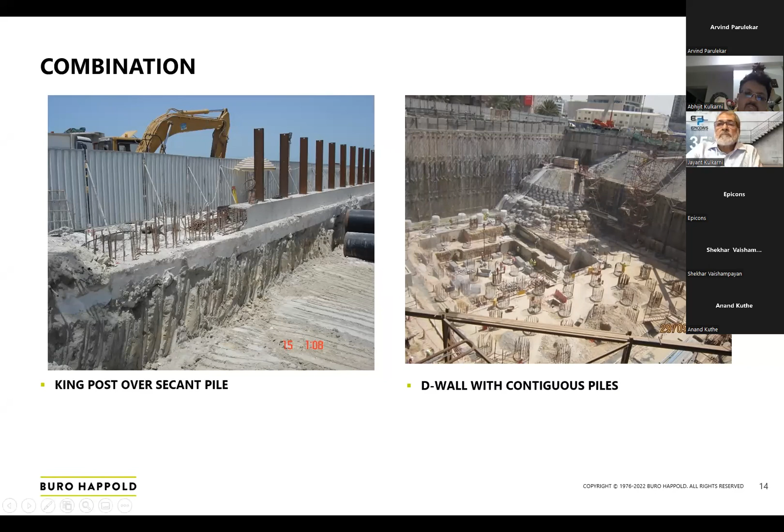Just quick reference to what I've been doing - we've been utilizing types of systems based on height of retention. So invariably, in Indian conditions or property sector conditions, you'll see we're excavating probably 2 or 3 basements.

So the rough order of magnitude of excavation would be in the range of say 8 meters to 10 meters, and then sometimes could go all the way to 20 meters. And then depending on the surrounding, depending on the availability of machinery, you would have a different shoring system being implied.

You can either strut that from inside if you have restrictions to put anchors. Sometimes these restrictions are put by authorities, sometimes by adjacent owners who say you can't go underneath their foundations. So when we plan it, you have to plan it thoroughly, identify these constraints, and work within them.

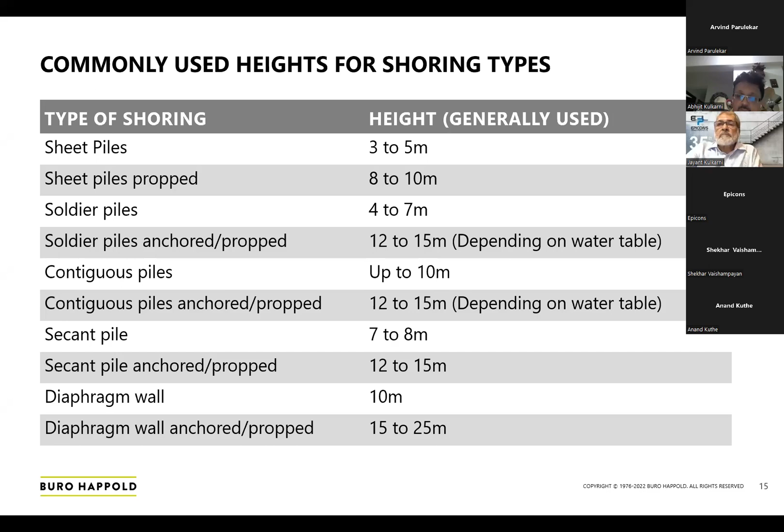Now let's talk about some structural engineering considerations. What is needed for construction of a deep basement? Obviously, size and shape of the site is critical, and so is the volume of work in terms of how many basements and what sort of soil we have, which affects how much time excavation and muck removal will take.

That will decide a lot about the amount of time the shoring system has to be operational. Once you construct the basement, the retaining wall is expected to take all the loads, and the shoring system becomes null and void, provided it's not designed as a permanent structure—there are solutions for that too. But normally it's designed as a temporary structure, so volume of work dictates how long the shoring system has to be operational.

Then topography condition—normally buildings within city limits will have reasonable topography, but there are chances you'll have a big site where topography varies. On one side you'll have a hill, the other side a valley, and water flowing in that direction. So you've got to be careful about how the topography works.

Then neighboring conditions—as I said, there are roads around the plots, there are adjacent buildings. Some buildings might be recent, some might be old, and we don't always know the foundations of the existing buildings there, so we've got to be careful there.

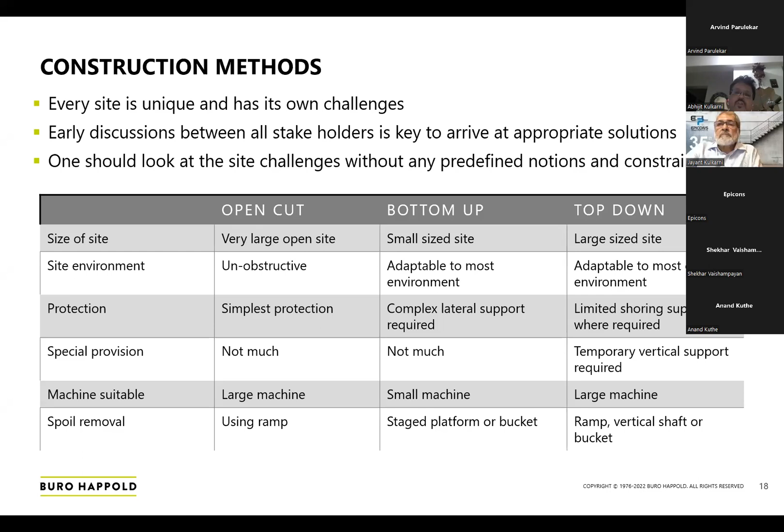Then from a construction perspective, most of the time we do bottom-up construction, where you either do open cut or install a shoring system. But sometimes you have top-down construction as well. When you have top-down construction, the shoring is often considered a permanent structure. So the quality of concrete matters, because a temporary structure might have a design life of around 5 years, but your permanent structure will have a design life of 50 years. So you have to be careful about the quality of that top-down construction diaphragm wall, since mostly it will be a diaphragm wall, acting as a permanent retaining wall in the main structure.

Then what is critical from a structural engineering perspective is, when you are constructing something in a deep basement, what is there at the site? If it's barren land and you are constructing fresh, fantastic - there is nothing obstructing you. But if there are structures on that land that need to be demolished, and those structures have basements, then things become a bit interesting and complicated.

Depending on the extent of those basements - existing building might have 2 basements and you are going for 3 or 4 - and the existing building might have already had some shoring system installed long ago, which is sitting there dead, and then you are going to demolish it and start excavating. So it becomes a challenge on its own, because depending on the location of these existing shorings or buildings, your construction activity would have to be tweaked and modified, which will invariably impact the new construction and new shoring system you would like to install.

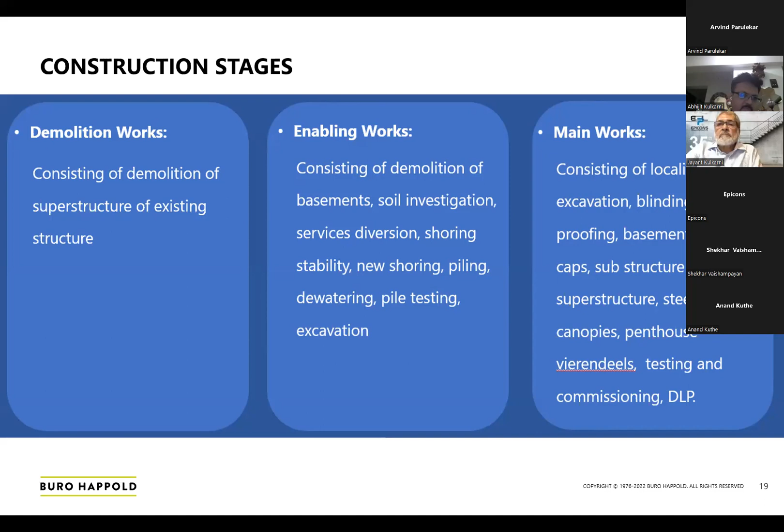So construction stages - whether it's demolition, an enabling stage, or main works - one way or other they are linked. So when we are planning a basement construction, these aspects need to be considered, and the impact of these aspects onto the shoring system has to be considered. I'll show you a couple of slides further down the line, what happened for one of my projects. Oh yeah, here it is.

Then there's clarity of thoughts from the structural engineer. Depending on when you visit the site and know that certain things have to be built, the structural engineer should start thinking about how to build it. It's not to be left with anybody else - the architect is not going to tell you, or the client is not going to tell you. It's the structural engineer who will dictate, saying, okay, I have to go down these many levels, then I need to protect all 4 sides, 2 sides, 3 sides, whatever, and I need to have some stability for roads or surrounding buildings.

Obviously, the geotechnical engineer will be part of this, but the geotechnical engineer would be looking into more details of these retention systems and coming up with options, carrying out analysis. But if you really look at it from the constructability perspective, before even the contractor comes on board, a structural engineer should have clarity of thought. At least one way of construction has to be thought through, so that when the tender goes out, your contractors don't come back and say it's not constructible. So the structural engineer has to have clarity of thought in terms of how to do it - it could be simple sketches, PowerPoint presentations, or some report.

And depending on the complexity of the project, your clarity of thoughts will vary. There will be influencing parameters in terms of time - some existing buildings might be occupied by end users, so they have to be vacated and demolished. All those aspects come into play when we talk about clarity of thoughts.

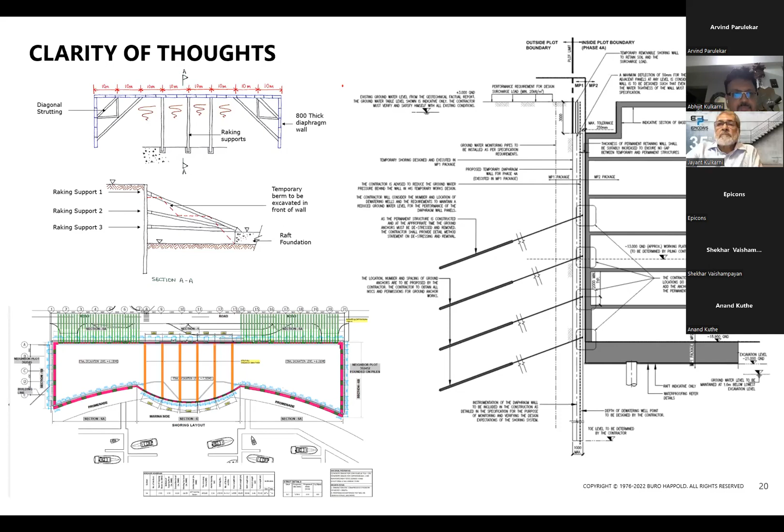And then comes the selection of the shoring wall system. This is not the structural engineer's decision, but the structural engineer can influence it based on what is needed for the main structure. Because our clients, the developers, want to construct something that can bring revenue. And when we say construct something, there are area calculations defined, revenue calculations defined, and invariably there are limitations on all these aspects put together on the construction methodology. That's why it is critical that an appropriate shoring system, suitable from the client's perspective and suitable from a geotechnical and site safety perspective, has to be looked into.

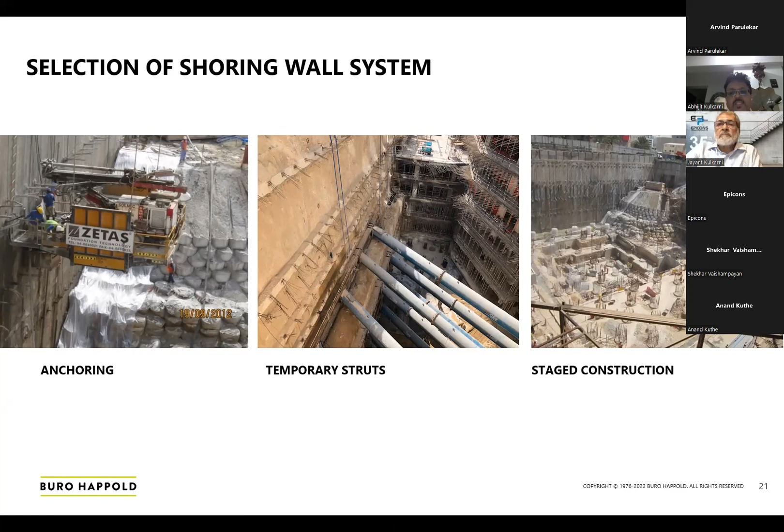You could do anchoring if you are allowed to do so. If you are not allowed to do anchoring, then you have to go for some sort of internal struts. Again, internal struts have a knock-on effect on the speed of construction. So you have to find out up to what level, up to what spacing, the internal struts can be. I'll come to that later. And then you can talk about stage construction, which I explained earlier on one of the projects in Dubai.

Now the images in the center, the top image was anchored underneath Dubai Marina, one of the plots, and you can see this on YouTube. Search for, I think it's Infinity Tower Collapse 2007.

So they anchored below the Marina, and then one fine day they started seeing water oozing out of the anchors, although they were grouted anchors. They notified that something was wrong, and within about 2 to 3 minutes, all these anchors just zipped up, one after another. The entire retaining wall, the diaphragm wall, which was about 900 thick, collapsed the way you see at the bottom, and the entire seawater gushed into the plot.

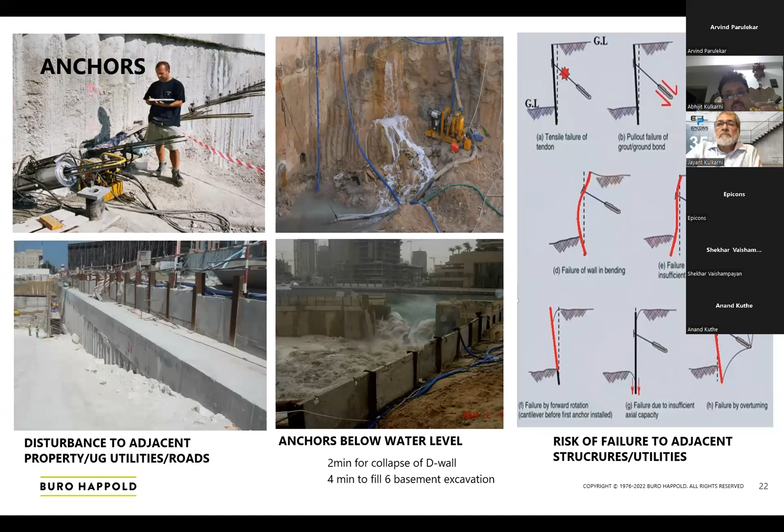So I was talking about this clarity of thought with anchors. This was one of the projects along that Dubai Marina, and this was an existing yacht club, about 15 years old, nicely done, glulam timber, and it was one of the key structures in that area. But that area was pretty premium, and the developer decided to demolish the existing yacht club and put in a hotel building which has its own yacht club. So he's rehousing that yacht club in a hotel, with residences above it.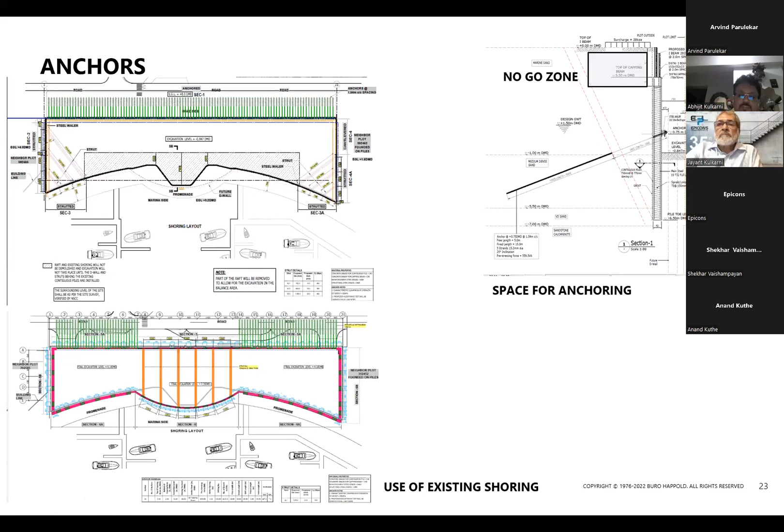So in the middle portion, which was pretty high in terms of excavation, and there was not enough space for putting this thick diaphragm wall to act as a cantilever, we went for struts, and it kind of ended up something like that. So you see here, the marina, the road, and then we had struts and one level of anchor along this line.

Then there was a strut at the center and anchors on that side. When we did this internal strut, as Mr. Vaishampayan said, it's absolutely critical that we identify at what level these struts have to go, because below these struts you are still having excavation and construction activity. There was a raft being constructed - a 50-story building to be built through that strut. So we had to plan these struts so they don't obstruct construction of the core walls, the raft, and the basement slabs.

We also identified at what time the struts have to be removed so that the main structure, with the foundation and one level of basement, is good enough to take the forces. So the strut levels and positions were identified based on the location of the core wall.

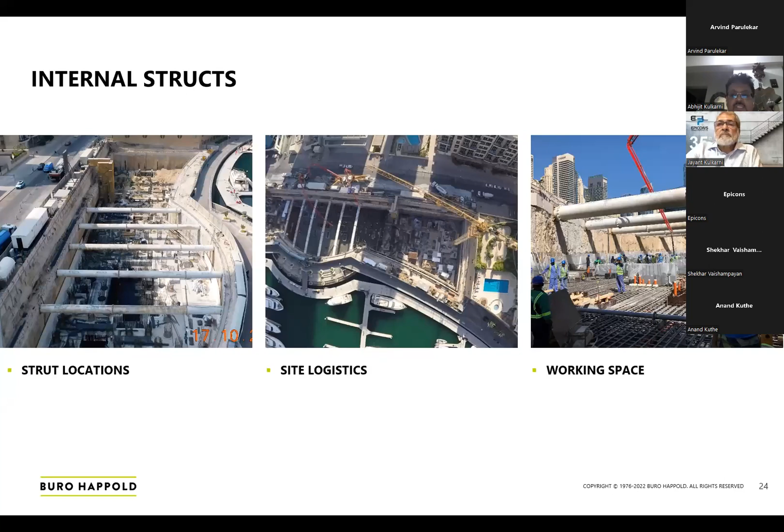Again, although this is all geotechnical, it has influence from the structural engineer's perspective. All this toing and froing between the geotechnical engineer, the contractor, the enabling works contractor, the main works contractor, and the structural engineer - it is all a collaborative effort. Otherwise, it becomes so difficult to manage these sort of complex construction activities.

So this was - if you see the top here - the site which collapsed. Water came in, so eventually it got fixed in that manner. Again, this was not our plot. Our plot was here, and we came to know about this because our plot was considered as the mass against which these struts were laid.

So we went in there and said, okay, we want to construct this building. Obviously these struts have to be removed because the moment we start excavating in our plot, these struts will become null and void, and the support they were supposed to give to that part of the soil would be lost, resulting in another collapse. So there were discussions between the client - we were working for them at that time - and this Infinity Tower Cayan Properties.

There were discussions about when the struts will be removed, what would happen when the struts are removed from one side, how the shoring system can be utilized, because they had put in a diaphragm wall all along here. And there was no need, because once this was 6 basement, and once the permanent structure was constructed, this diaphragm wall was standing freely between the two retaining walls. So we said, okay, we give you some leeway in terms of time to construct your structure.

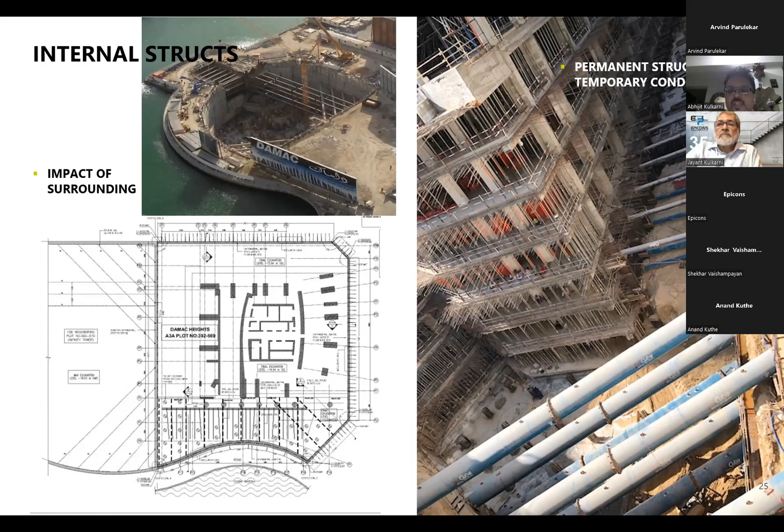And when you put in these sort of struts against the main structure, they transfer forces, right? All these struts, you are utilizing the main structure to get the forces from the retention structure. So that means your main structure has to be designed to receive these struts, whether it's with a spreader beam, whether it's direct punching shear, or you have to have some sort of beam already designed into the main structure and constructed before you install the strut. So that's where the structural engineering of the building has to interact with the geotechnical engineers and the retention system contractors and engineers. Again, collaboration is absolutely critical in these sort of situations.

Anchors on the other side give you that freedom, but anchors have their own design life. Sometimes anchors have to be re-anchored if your excavation remains there for quite some time, or if you have a flood condition, or some sort of soil loss or silt condition, and then your anchors become weak. So there's a bit of a challenge there on anchors. And then you can't do anchoring near water bodies because you don't want to create an easy path for water to gush through. So anchors have their own challenges.

Similarly, struts have their challenges, and depending on what suits the construction activity, one has to check which option is better, like whether a diaphragm wall is better or a secant wall is better. Exactly the same thing, whether anchored is better or designing a cantilever is better. Sometimes you might not need all this, but you need a thick wall.

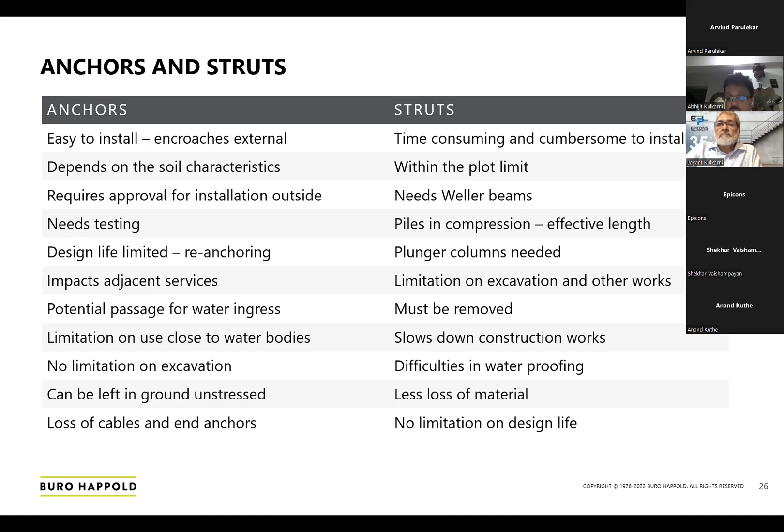Or use a strut could be an option. Now, some checklists from structural engineer's perspective when you are in this sort of deep basement construction activity. I've categorized that in various headings, and it might be helpful for you to add on points there, but I thought these are some critical points.

Design life is normally for our buildings designed for 50 years, and sometimes buildings are designed for 100 years as well, because you have massive investment, thousands of crores. So you're not going to demolish the buildings in 50 years time. Design codes say design life is 50, 60 years, depending on which code you use. But if it is a temporary structure, then you don't have to worry about a lot of things.

The shoring system itself, if it is temporary in nature, and you are going to construct a permanent retention system, then you don't have to worry about crack width, you don't have to worry about the grade of concrete. Whatever is needed from the strength perspective, provide that much. You don't need triple blend concrete and GGBS and silica fume added to that, or crack width calculation checks for the shoring system, because the shoring system is only for 3 or 4 years, and normal concrete is good enough for that.

Whereas if you are using the shoring system as a permanent structure, like putting a diaphragm wall, or a secant pile, and want to construct a 200 millimeter thick RC wall in front of it, with the combined system acting as your permanent retention system, then you have to be careful.

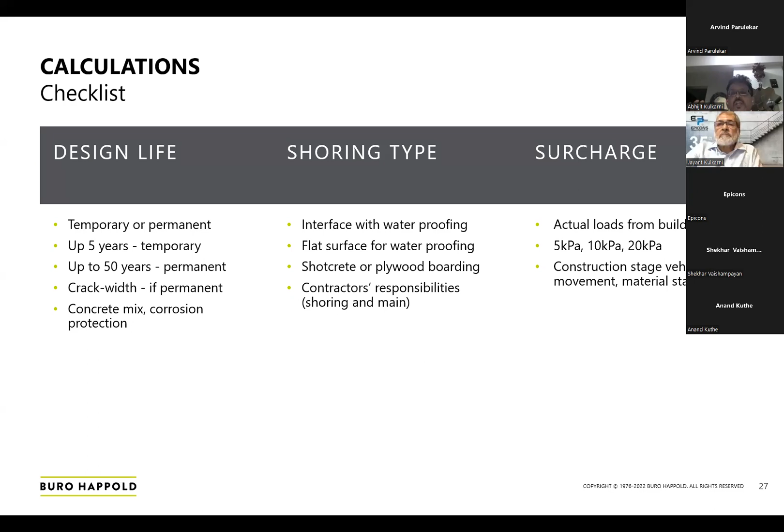Normally you would end up designing for minimum 10 kPa, if not 20. But then there are projects where we insisted on 20 kPa surcharge, because irrespective of what happens, the contractor doesn't have space on other areas of the site, so he is going to stack material in that area. To allow that freedom to the contractor from a logistics perspective, we said let's design it for 20 kPa. Then comes the water.

The shoring systems can be designed as a water retention system. Normally not required, but it can be. If you are designing for that, you have to consider where your dewatering well points are. Are you lowering the dewatering behind the shoring system so the water table is not significantly high? You also need to look at where the dewatering well points are inside the plot, whether they are correlated so they discharge at an appropriate location connected to a main discharge line. Then in a temporary condition the shoring system may be designed for water, but in permanent condition it will only take the earth load, and the permanent retaining wall takes the water pressure.

So you can split that, and we have designed a couple of buildings that way. Most critical, as Mr. Vaishampayan has alluded to, is the toe level of the retention system. When you are dewatering inside the plot, what should not happen is water from outside gushing underneath your shoring system and coming up just because of water pressure, inside your plot. So you have to have enough embedment length into your shoring system, whatever system it is. The toe level has to be deep enough that you are not siphoning water or creating a passage of water into the working space.

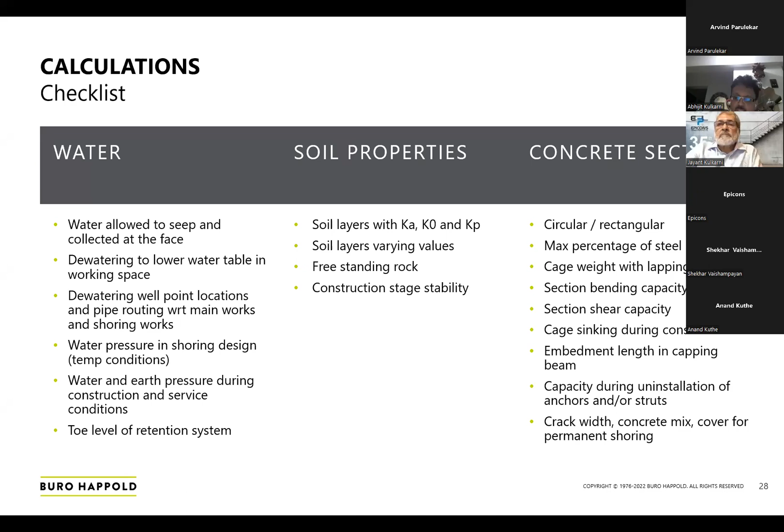And then comes the anchors and struts. Somebody asked a question about how you define the anchors. There are methods available to test anchors. Indian codes have them - I'm not using Indian code for this, but there are 3 types of tests in BS 8081, which you can read through the BS available on Google. And then these anchors have to be designed.

Then there has to be testing like piles. We carry out some preliminary test piles. Similarly, we have to do some proving tests for anchors so that we validate our design. And once the design is validated by proving test, then you can utilize that design for the following anchors. And then you carry out some sort of acceptance test during the installation of the anchors.

And then there are intervals, and a number of tests that are required to be carried out in terms of percentage. Each code has its own limitations, so depending on which code you follow, carry out those tests at site. For struts, it is pretty straightforward.

Sometimes the struts are proprietary design, but suppose they are not, they are basically compression members, circular compression members with a freestanding length. The challenge there is, you're designing the strut for horizontal, but then the self-weight of the strut acts as a vertical load. So effectively, struts are subjected to being like horizontal columns - you have a bending moment and an axial force. And the longer the length, the more the bending moment, and the less the capacity of the strut.

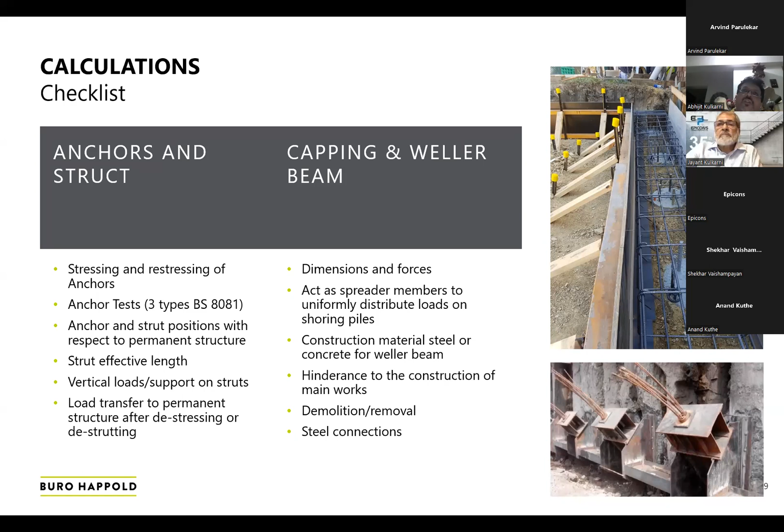Similarly, the tie beam acts as a tying beam together, so suppose one pile is a bit weak and the other 2 piles are strong, then it kind of spans between that. So design of these beams, again, it is not necessarily a permanent structure, but it has to be properly and thoroughly checked and designed so that you don't end up into challenges during the main works construction.

And then comes tolerances into the shoring system. 1 in 75 is reasonably accepted on verticality. Sometimes it goes to 1 in 100, and sometimes it's 1 in 300 for some very tight spaces. But 1 in 75 to 1 in 100 is a reasonable acceptance tolerance.

That is for verticality, and then for position, depending on how good the contractor is, you still have to allow for position tolerance. When I say position, it is at the location of the pile where we are constructing it. So around 50 to 75 mm position tolerance is reasonably okay.

And then deflection of these systems, short-term and long-term deflection, you need to include into your overall analysis and overall tolerances, because that's a gap you should allow for between the main structure and the shoring system. You can backfill it by either concrete, lean concrete, or probably earth filling with compaction, depending on what propping system you're going to use. So these are a bit of the tolerance considerations.

And then there are analysis tools. Structural engineers are normally not required to know this, but it's always good to know how the design has happened, whether all the stages of construction are considered in the analysis. There's Oasys, there's Plaxis, which is probably high end, then there's Reward, and then there are in-house spreadsheets from various geotechnical and structural consultants.

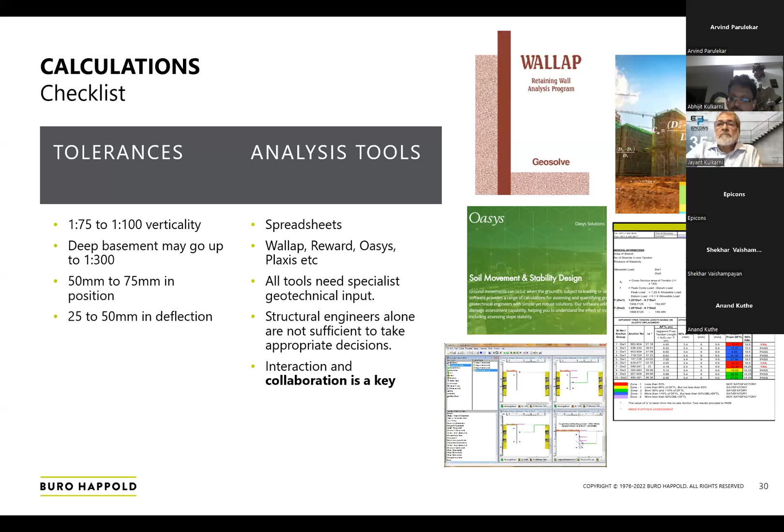So with analysis tools, I wouldn't only bother about it, as long as it is properly thought through. It can be hand calculation also if it's not that complex, but it has to be thought through - saying okay, I'm going to construct this way, erect this way, and de-strut or de-anchor this way. Once all these aspects are thought through, then any tool is a good tool. And that brings me to the end of my presentation.

One is authority requirement in terms of placing of the shoring system, where that shoring system should be. Should it be directly on the plot line? Should it be away from the plot line, inside the plot line? Can it be slightly outside the plot line? Depending on which part of the city you are, the rules would vary.

In Dubai, around 600 millimeters outside the plot line was accepted in certain old Dubai areas, whereas in the new Dubai area, especially around Burj Khalifa and the south side of Dubai, it is not allowed. So you have to put it inside the plot because it's a brand new area, and you're not allowed to go anything outside.

Second aspect, the authority requirement is the level at which your permanent shoring system should stop. When I say permanent, it's the concrete shoring system, because services running in the roads have to come inside your basement at a certain level or location. Generally they tend to push it in around 2 meters below surrounding level for the capping beam, and you put in an I-beam and slab panels above that, so that soil is retained and those things can be removed later so your services can come in.

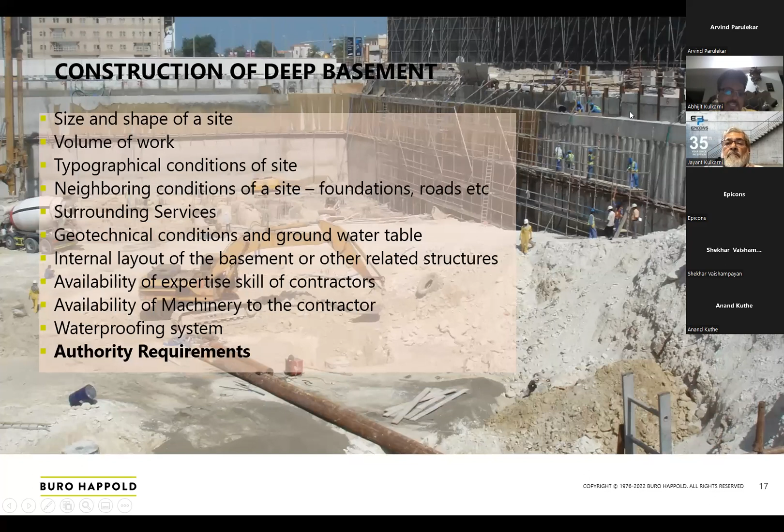I hope it was useful. There's no question, does that mean people are not interested? No, it's not like that - the information is at a very different level, so it's difficult to know what technical question to ask. That may be the question. It was very good, and there's something we don't come across in practice in India. Thank you, sir. One moment, there's a second... I thought one question was there, but there's only a comment: 'Very informative.' That's all.

So, looking at Indian construction activity, I think we have to do a lot of catching up. I've seen a lot of sites - even in my third year in India now, with the first two years going into the pandemic. But visiting all the sites and seeing how things have been built, there's a lot of learning and unlearning - more unlearning. People say this is how we've been doing it for the last 20 years, but that's not correct. It's not that everything is bad, but there are better ways of doing it, and we should embrace those better ways.

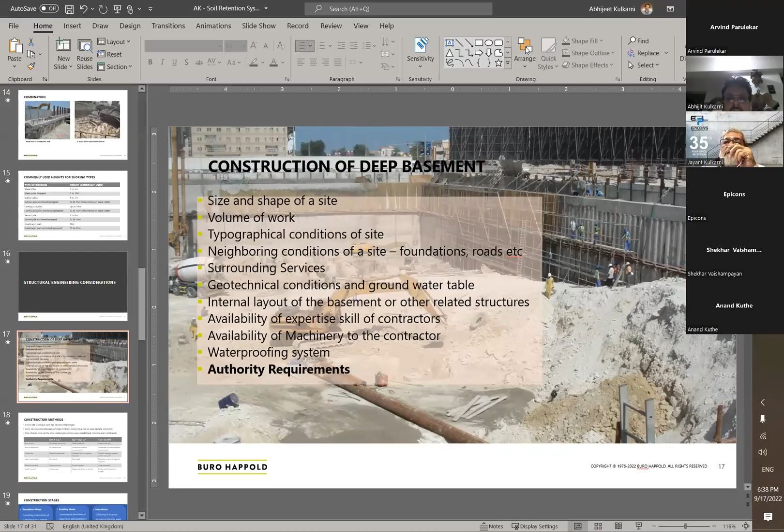So first of all, I will thank both the speakers. Excellent presentation by Vaishampayan, step by step - all the things explained like a textbook, and it can be used as a reference lecture. Maybe we can have a supplementary lecture on whatever he has said or not said. Abhijit Kulkarni gave a different perspective on what is happening in Gulf countries, and different kinds of experiences we normally don't get here.

I had quite a few friends working in Dubai as contractors and consultants, and I'd been hearing from them about the very stringent requirements of the municipality and the very good engineering teams there. We got some glimpses of what consultants have to face, and I like the idea of having an in-house debate, presentation, or test trial before going to the municipality - it shows how meticulously things are checked.